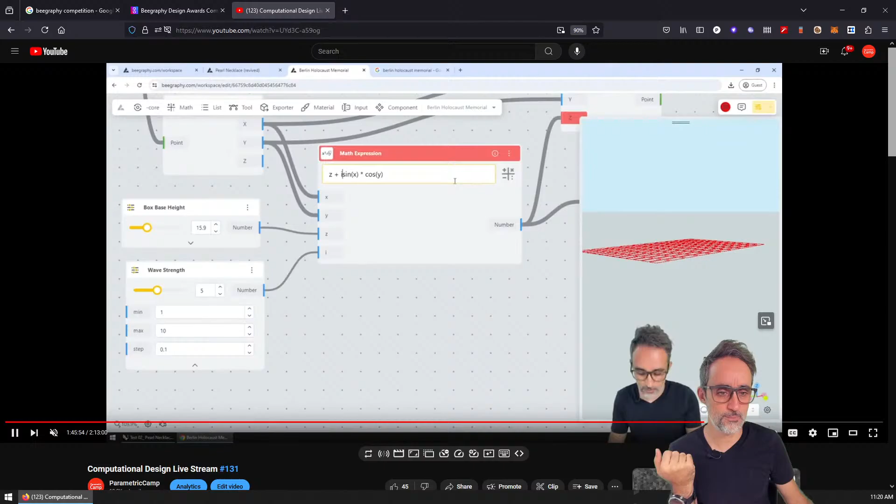On the last live stream we did, we basically played around with the Beegraphy editor, and we made the Holocaust memorial exercise.

And then we made another exercise just to try it out. So what I would like to do today is, I had a plan for 4 videos that I wanted to make. I want to make a short series of intro to Beegraphy videos, and this should be very short. So intro to the editor, then the 2 examples that we did last week, a bit more streamlined than last week, because last week I was just trying on and off.

And then just make like a small thing. So I would like to do that today.

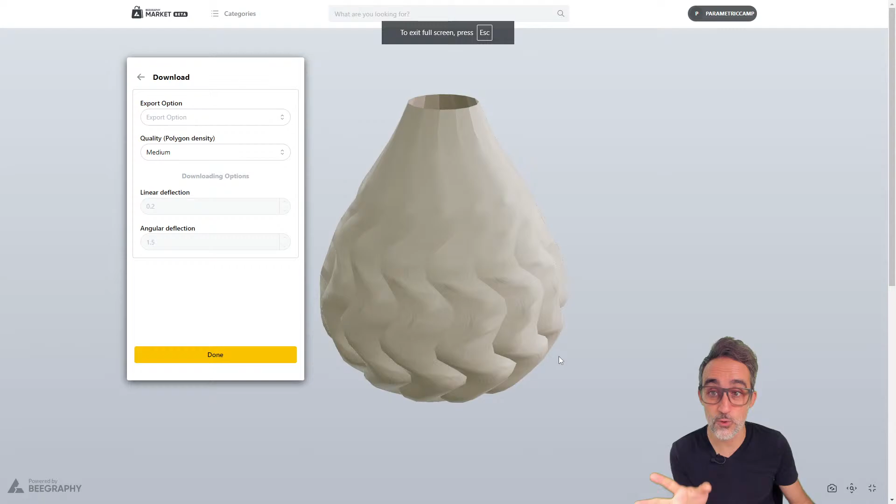This is, what is this? This is very, oh, this is very nice, to customize the model and then just download a version of it, down, etc. Yeah, which I think is, again, to me one of the coolest features. It's one of the most powerful features. The fact that you can make a parametric definition, a parametric model, and then just make it accessible and usable to everyone for download super fast, with this very interesting UI. So that's going to be the intro that I want to do.

So let's get started then. So I'm going to then, now what is this? Yep, I'm going to, why am I not? Okay, okay, here.

Okay, so we're going to start here in the first intro video. And the first intro video was going to be a general short intro. So what am I going to do? I'm going to say, this is Beegraphy. It's July 2023. So if you're watching this in the future, maybe things have changed. But right now, I want to make a short intro to the series.

In the first video, we're going to focus on the editor, and then on the editor, I'm just going to make a new model. It's going to be blah, blah, blah. And then you're going to have here the window. You're going to have here the components, sequence, tools, etc. And then exporter, which we will talk about when we talk about the market, I think.

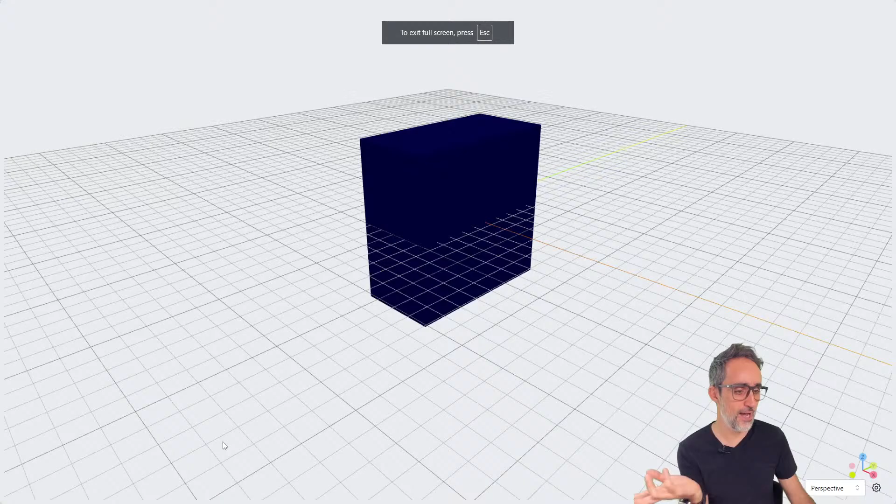And remember, the 3D viewer, I can make it full screen, I can change the shadings, I can turn off the grid, for example. I can do top view, front view, perspective view. It's actually quite nice.

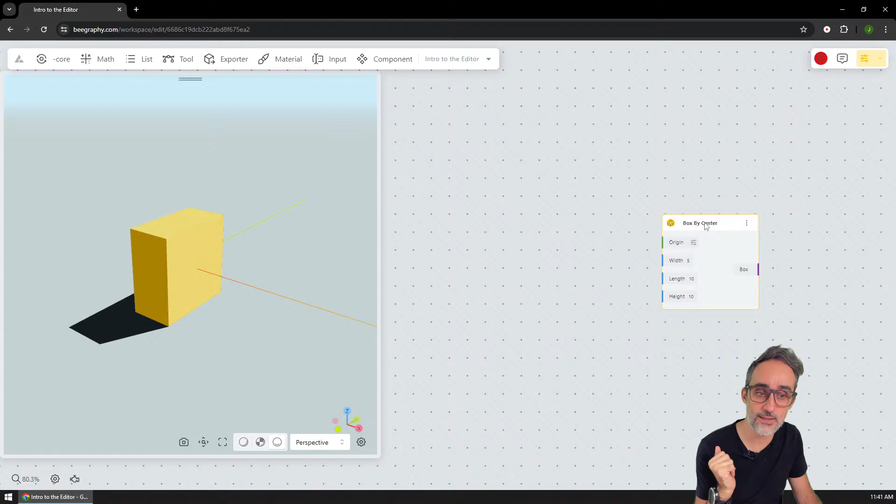But if I don't know where to find things, or if I don't want to sit down and look through all the possible options because it's a little overwhelming, I can just double click on the canvas and this drop down search box will show up. So I can type here box, and you can see I have a bunch of options for what I can do with boxes. For example, I can do box by center, which is the one I had before. You can see right now the box is centered at the origin.

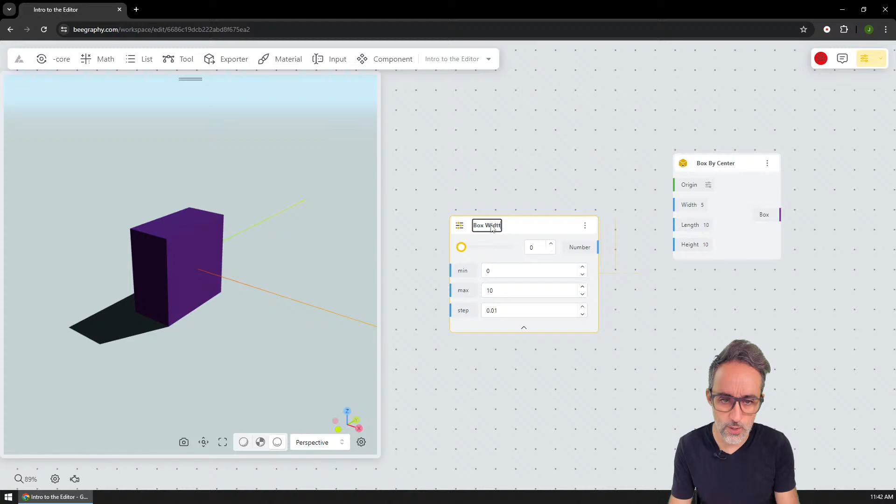It has a width, length, height, so I probably want to customize the dimensions. The way I do that is using a slider. Here in Beegraphy, sliders are called range inputs. If I click on range input, I get a slider that I can customize. So for example, this is going to be 10, in increments of 0.01. I'm going to double click here to say box width, and I'm going to plug this in here. Then I plug this in here, and I'm getting an error.

It has to be greater than 0. So this is going to be the length, and now this is going to be the height, correct? You saw that I did that by basically copy pasting. So now I have width control, height control, and length control.

Beautiful. And you can also see that under the origin, I have an input of the type point, which means I can control as well where the center of this box is. So maybe what I want to do is customize that center by creating a point manually. Let's go to point and construct a point by XYZ coordinates. Right now that point is centered at 0, 0, 0.

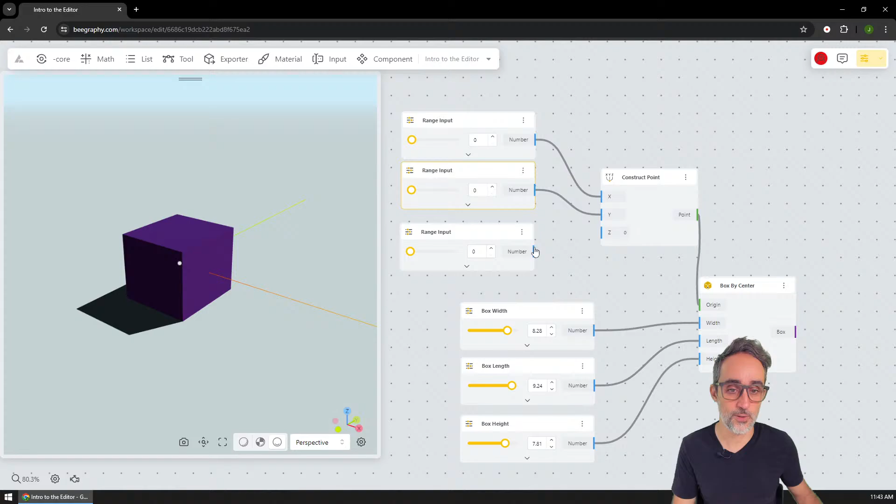But if I do the same thing and set a range input, and copy paste this 3 times, and say it's going to be X, Y, Z, now I can control the location of this box. All right, beautiful, so that's it.

Literally, this is just the Beegraphy editor. As you can see, the UI is very familiar if you have used other visual programming environments. If you have not, I recommend you take a look at our Introduction to Parametric Modeling playlist, there's a card popping up on the corner right now. It's very easy, very intuitive, very familiar, and you will have an easy time connecting with the way the Beegraphy editor allows you to model things in 3D.

All right, beautiful. So with this, I just wanted to make a simple example. You don't have to change anything, you don't have to save everything. Any kind of changes you make are already saved in the file, in the cloud, in the dashboard inside of Beegraphy, so no need to worry about this.

And then what I would like to do is make a couple hands-on exercises to practice and to do more sophisticated modeling here in Beegraphy. Let's move on to the next video in this playlist, where I'm going to teach you how to model a necklace, for example, full of pearls, using the Beegraphy editor. Let's take a look at how to do that. See you in the next video. Bye.

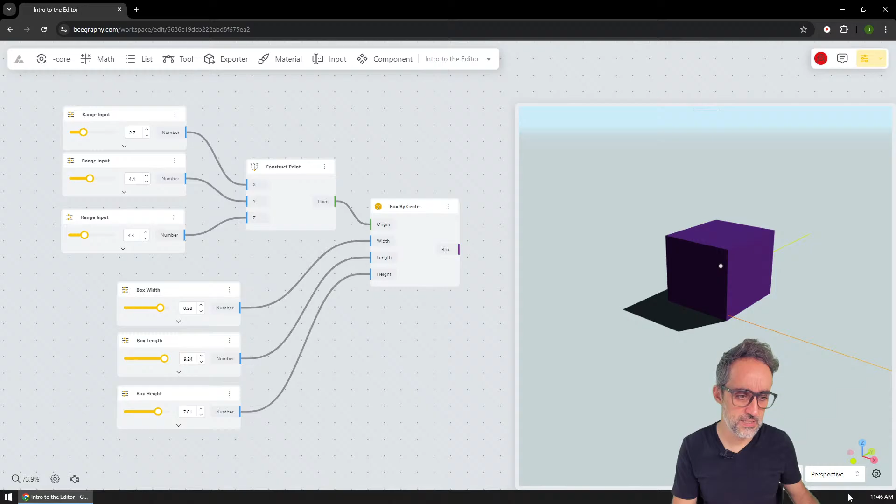Okay, now question: should I keep the window here on the left-hand side? Since I'm here on the right-hand side, it's probably easier to see things. Or maybe not, because if I have the thing here and the thing here, maybe it's a little easier? Maybe it is, I don't really know. Yeah, maybe I can leave it like this. Why not? This is how the Beegraphy folks designed it, so why not, we can give it a try. All right.

Beautiful. So we're going to go on to the next video, where we're going to record a pearl necklace.

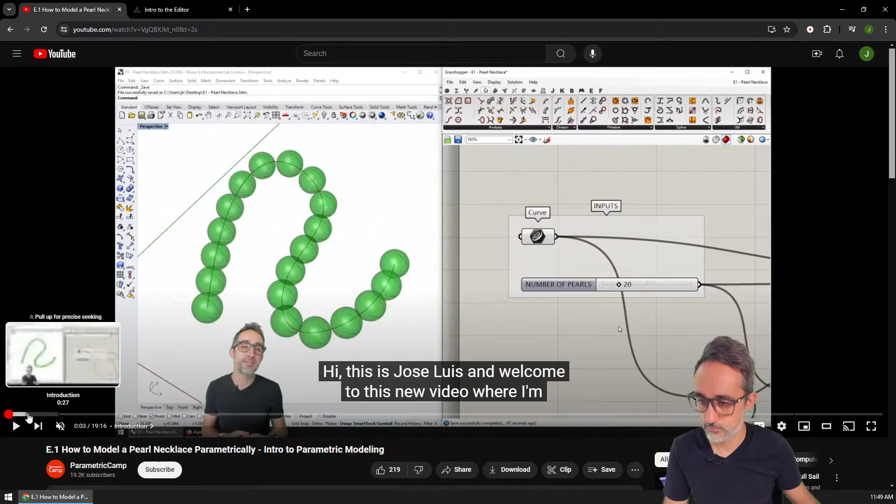Wow, I recorded this video three years ago. Look, I look so young. Oh my God, oh boy.

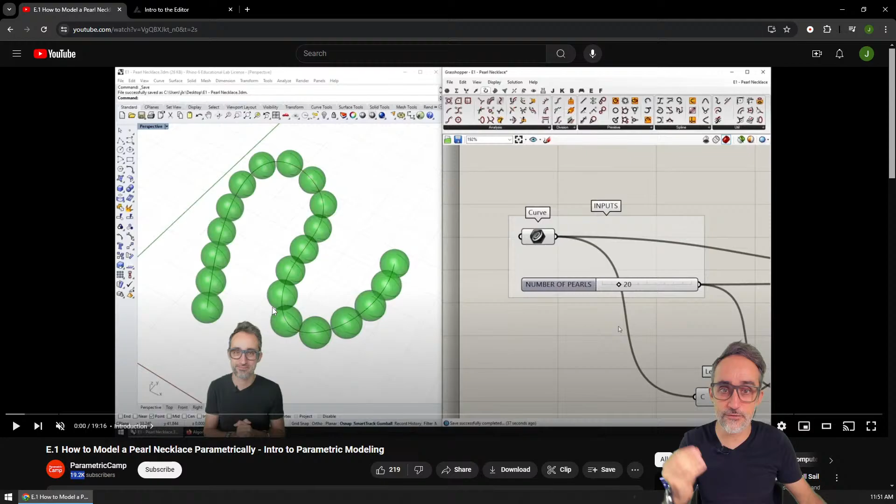Beautiful, let's get started. But before we start, I'd like to remind everyone that this pearl necklace is an exercise we've already done on this channel in another visual programming environment called Grasshopper. If you want to learn about the logic and how we break down a curve into parts, I already explained it in that video, including the logic about the diameter of the balls and splitting of the curve. So if you want to learn more, I recommend checking that video, whose link will be in the description and will pop up as a card in the corner of this video.

Okay, beautiful, so we're going to go to the Beegraphy editor. All right, we are here at Beegraphy, I'm already logged into my account. I'm going to go to the editor and create a new model called Pearl Necklace Live. All right, beautiful, then we'll land in the Beegraphy editor, which we already explained in the previous video in this series.

So the first thing we're going to do, if you remember from the video on how to model a pearl necklace, is create some kind of curve, which will basically be the axis of the necklace. Then we'll subdivide that curve into however many pearls we want, and decide what the radius of those pearls should be.

All right, so Beegraphy as of right now does not come with geometry import capabilities, so it's a purely standalone parametric modeler. You can't really import models yet, but my understanding is that the team is working on that right now. The thing we can do is, inside Beegraphy, add a modeler for this parametric curve that we want to control.

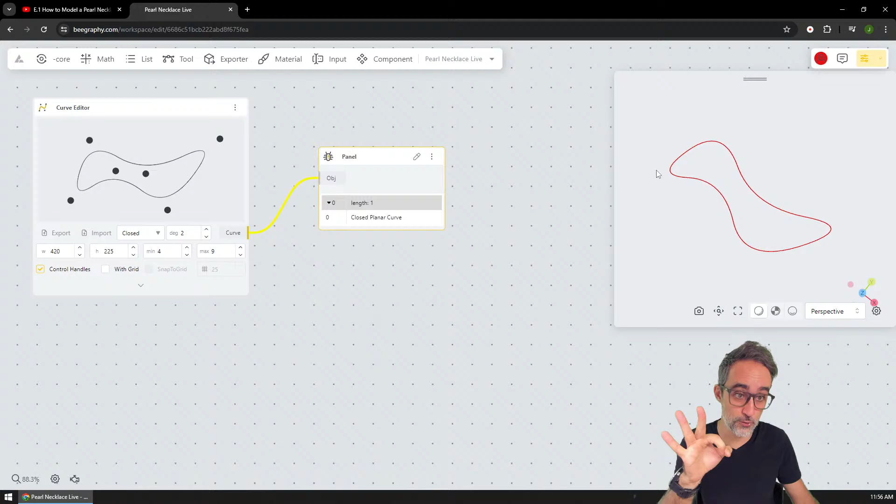So what I'm going to do is say divide by count, and you can see that right now I have this divide by count on a curve. So I'm going to plug in the curve here, and you can see that I already subdivided it in 4 elements. But I do want to have control over that, so I'm going to just say here range input.

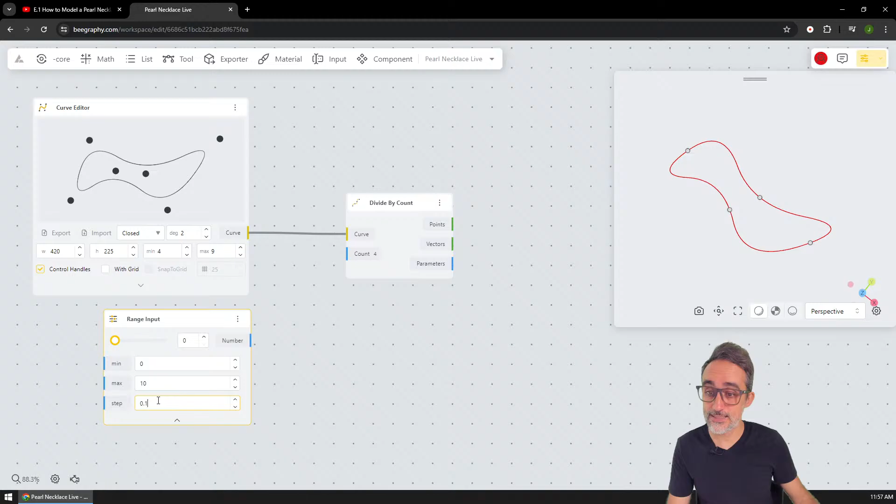And I'm going to place here a slider. But this slider, I'm going to configure it so that it can only snap to whole values, so to integers, right? And the maximum is going to be 50, for example, and the value is going to be 10. So I'm going to minimize this, and I'm going to say here number of pearls.

All right, beautiful. I'm going to plug this in here, and you can now see that the more pearls, the more subdivisions, the more points I get.

One very nice feature about this is that I can now go onto the window and click on an element. And if I click on the element, it will tell me where that element is coming from. So you can see that basically the UI just zoomed into divide by count, which is the component that is creating all these points here. This is a really, really nice feature because very often we have a lot of geometry on the viewport and we don't know which components are generating that geometry. So this idea of clicking and seeing which component is creating that geometry, I find it a very useful feature.

All right, beautiful. So now we have the points. We also have the tangents at the curve on those points. We have the parameter, so the value from 0 to 1 or other that is telling us where those points are on the curve. So what I would like to use now is these points as the center of the pearls that I'm going to create.

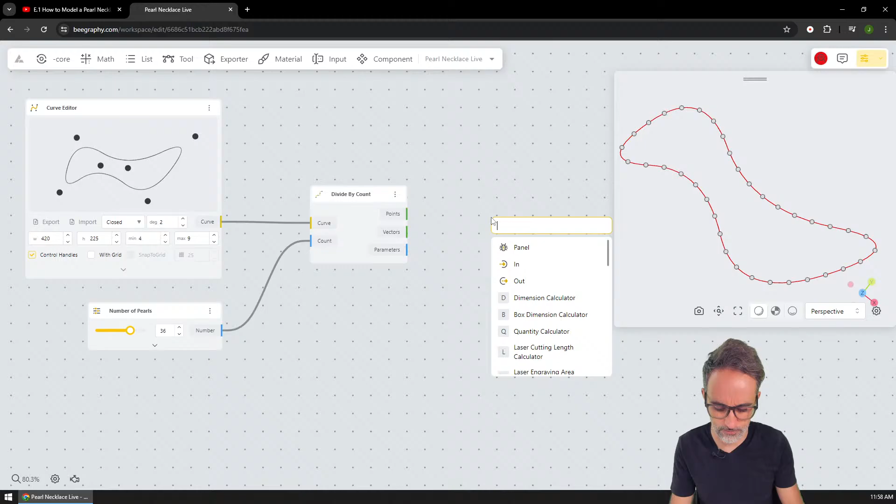So I'm going to go here and say sphere. I'm going to create a bunch of spheres at this origin. Okay, and you can see that right now it created all these spheres right there, and you can actually see that it feels like they're almost tangent to each other.

So I'm actually going to go to top view, and you can see that they're actually pretty tangent to each other, except for some areas. But this is misleading because if I were to increase or decrease, it was just a coincidence.

Right now the radius of the sphere is a hard-coded value. But what we need to do is estimate what that radius should be based on the length of the curve. So we're going to take the curve, calculate its length, and divide the length by the amount of pearls, and that should be approximately the diameter of each one of these pearls.

So easy peasy. We have the curve, and we need to calculate the length of the curve. So how am I going to do that? I see that I type 'length' here and I get this component called curve length. I'm going to go here and get the length, and drop a panel just to see what's going on here. I can see that the length of this curve is 652 units, whatever those units are.

Then I'm going to subdivide that length by the amount of pearls that I have. I could do that numerically using the math components, but you already know that I like expressions. So here in inputs, there's the math expression component that lets me write a mathematical equation that gets evaluated. I'm going to plug in the length, and then create another input. How did I create more inputs? Here, add port—you click on one of the inputs and click add port—so the number of pearls is going to be here.

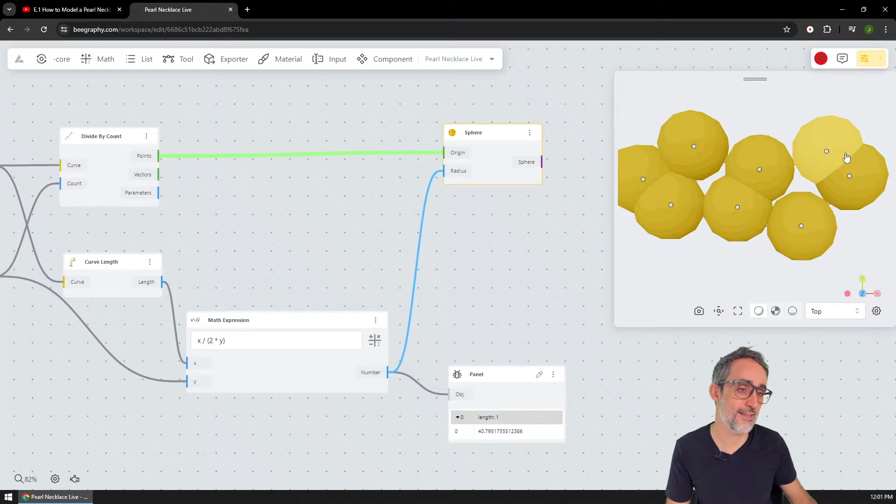You can see that now they are a little bulgy, and at the areas where I have a lot of curvature, it's not very natural. So maybe I can reduce those steep curvatures. But you can also see that if I increase the number of points, the size of the pearls adapts correspondingly, which is also quite nice.

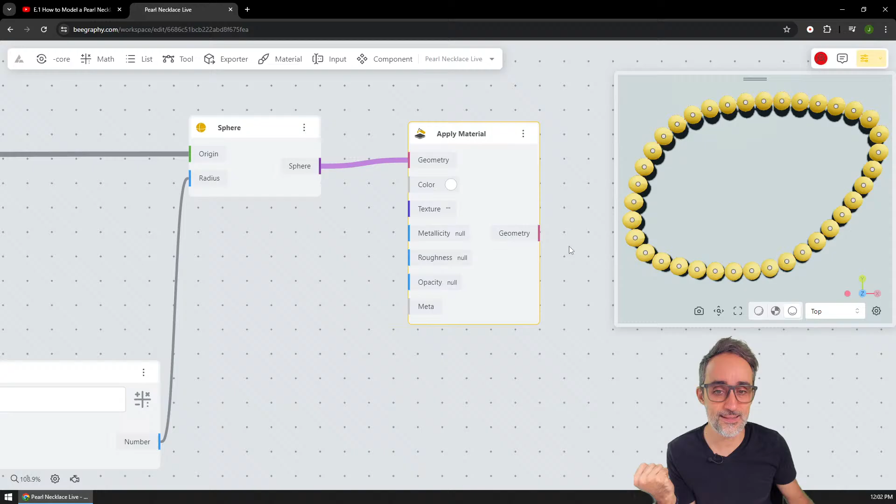What I would like to do is change that to something a bit more steady and controllable. So I'm going to go here to material, to apply materials. This is basically a component that lets me create a material and apply it to any kind of geometry. For example, here to the spheres, I'm going to apply this—can I create a color picker? Yes, so I'm going to create a color picker, and that's going to be some kind of orange here. The color is going to be orange, you see? Or if I make it green, then green it is. Now things are a little more homogeneous.

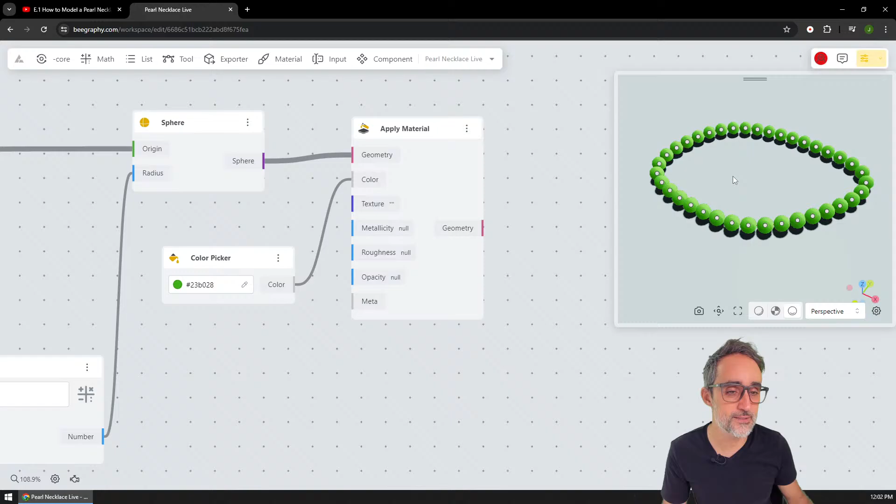Another thing I'd like to do to beautify this a little more: you can see that now I have modeled the spheres, but I still see the dots, the centers of those spheres, the points I used to create them. I know that if I click here on the sphere component, the origin is this divided by count. So something I can do is hide this component so it doesn't show up on the pre-visualization here.

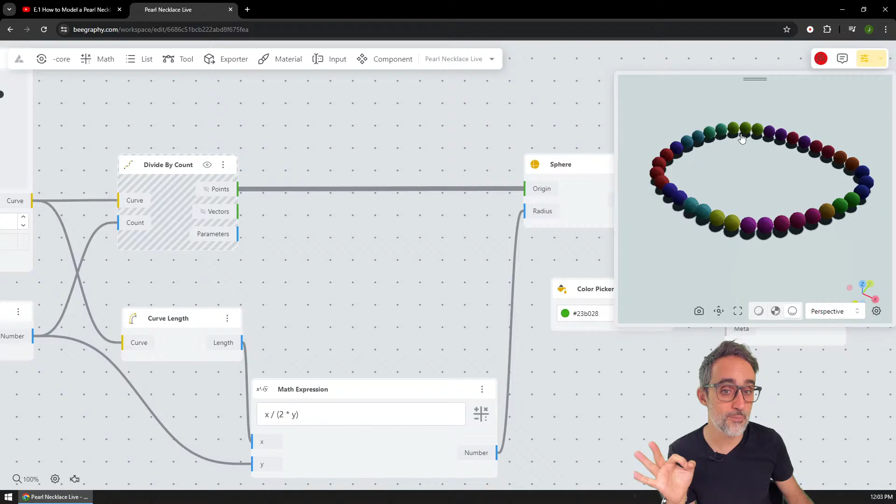Okay, beautiful. All right, and I think with that, I am pretty much done. Now, you may ask yourself, all right, you created the parametric modeling editor, now we have all the pearls, but now I want to download them because I want to render them in some software, I want to 3D print them, whatever. How do I do that?

Well, that's a very good question, and I would like to address that farther down the road in this series of videos when we start talking about the market. It's not necessarily that you need that, but if you're interested, circle back in the next video or in 2 or 3 videos when we talk about exporting geometry and publishing models to the market.

Until then, I think the next video in this series is going to be another hands-on example to give you a sense of how the Beegraphy editor works. We're probably going to model the Berlin Holocaust Memorial in the next exercise. All right, beautiful. See you on the next video, bye bye.

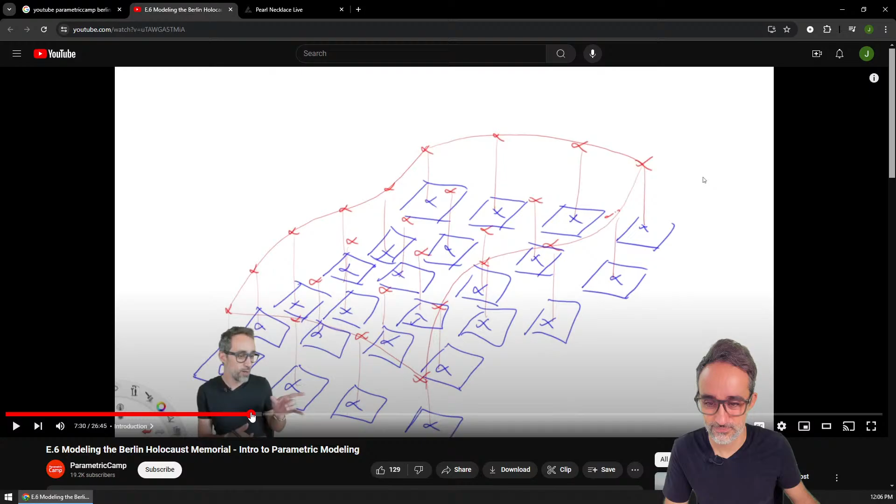6:22, oh, I have to record the intro. Oh, I forgot, I have to record the intro. All right, so let's record the intro. Okay, so the intro to the video. What am I going to say?

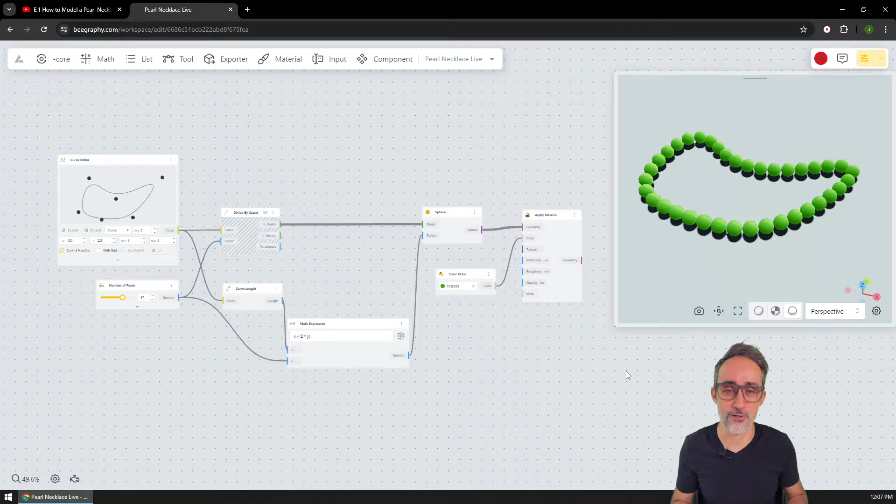Hello, this is Jose Luis here at Parametric Camp, and welcome to another video in this mini series crash course on the Beegraphy platform, or I'm not even sure how we're going to call this playlist at this point. But in this first hands-on exercise, what I would like to do is practice modeling something with the Beegraphy editor. For this video, I've chosen a very simple exercise, modeling a pearl necklace. As you can see, we have modeled it with the Beegraphy editor, including this very nice and nifty curve editor for the shape of the necklace, as well as introducing parameters for the amount of pearls. You can see that as I change things, the number of elements is updating, and you can see here in the viewport, I can rotate and see the results of my parametric model.

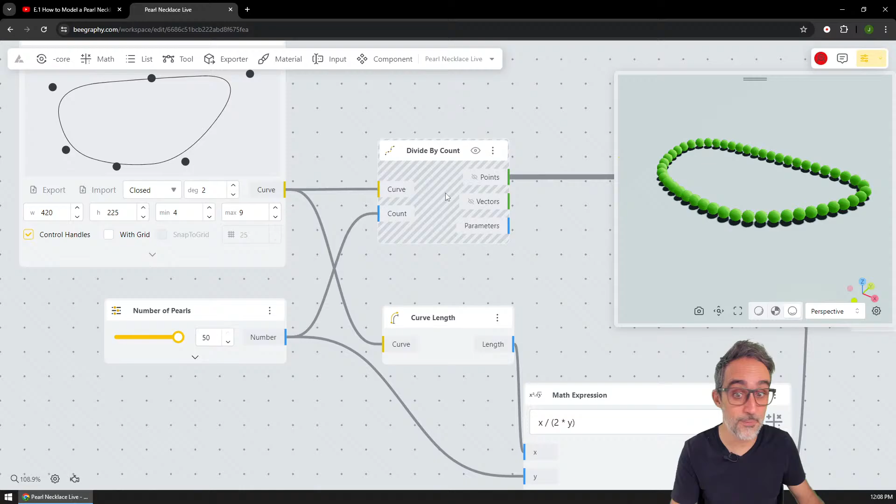And again, for those of you who might be new to the channel, what's really interesting is that everything I'm doing right here is purely web-based, using my browser. No downloads, no installs, no nothing. Everything is cloud-based, web-based, which is really, really nice.

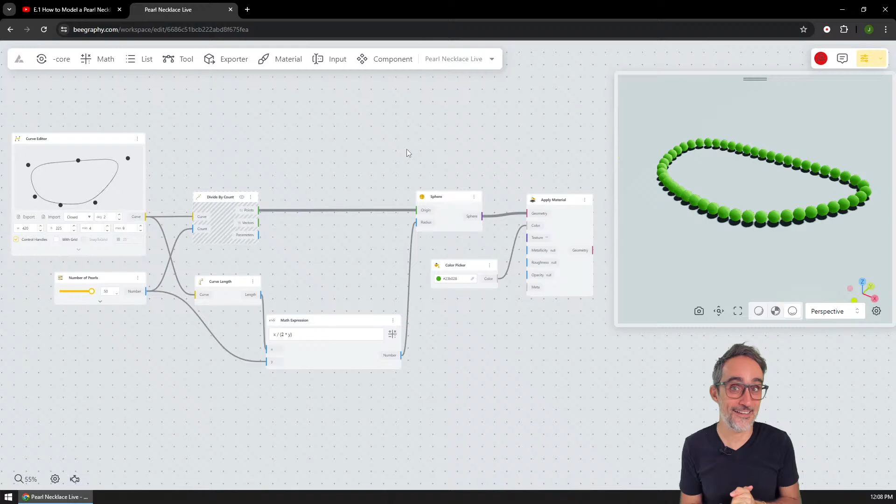Fantastic. Okay. All right, and then here. Oh my God, who placed all these ads here on the channel? Huh? Okay, beautiful.

So now we're going to do the Berlin Holocaust Memorial. Same thing, let me actually go back here and take a look at how we did this. Oh, and this was the whole fuss that we made for either random or not random. Rectangular grid. How did we do this?

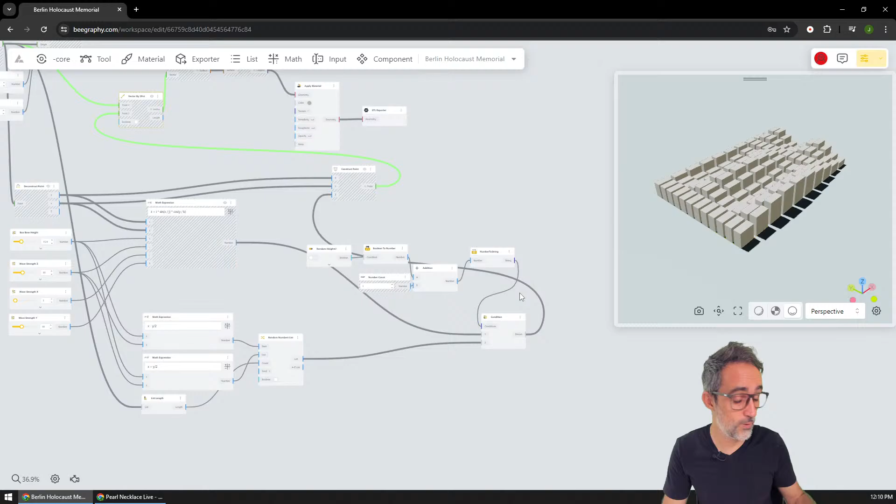Untitled group, spacing, extrude curve, vector by 2 points, and the extrusion was coming from a sine wave, and then we were capping it, or the extrusion was coming from a random number list, random number generator. And this was, maybe I can also point to the version when I did this in the live stream if people want to learn more about how to use these random heights, whatever. Okay.

All right, so the way we're going to record this video is we're going to go there, we're going to record the intro later, and then we're just going to do the same thing. I'm going to introduce the exercise from the other videos, and then I'm just going to go in, create the file on the dashboard. I'm going to then start step by step, creating the rectangular grid, creating the rectangles, and then writing the algorithm for the curvature.

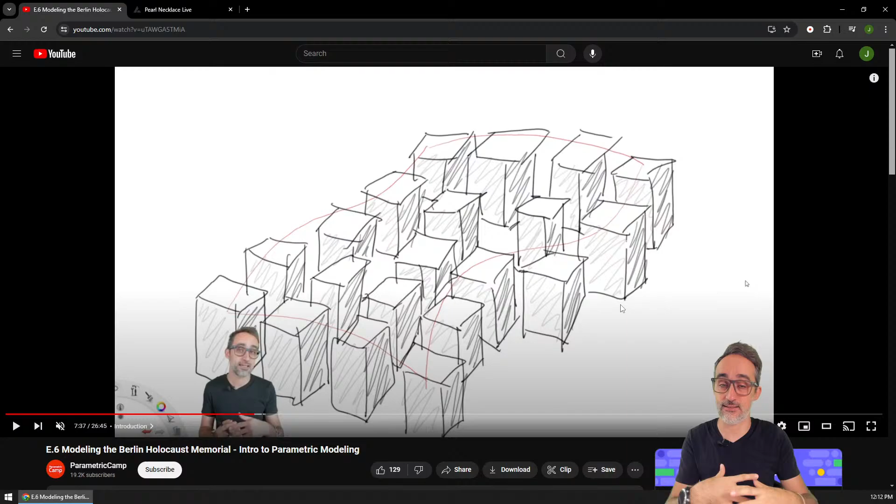Okay, so we're going to do just like we do with any model in Beegraphy. I'm going to go to my dashboard - I'm already logged in with my account - and create a new model. I'm going to call this Berlin Memorial Live, and create a new empty model.

How am I going to start? Well, if you remember from the image I showed before, the memorial is basically a collection of concrete blocks that have roughly the shape of a box. What makes the monument interesting is that they're all arrayed in this grid-like manner, but the height of each box is variable - it differs.

So what we're going to do is start by creating a grid of points, roughly a rectangular grid, and then create blocks at each of those points - we're going to create boxes. Once we've done that, we'll modify the algorithm so the height of each box is different based on some kind of rule. Let me get started with that.

First, I'm going to create a grid of points, which I'll use as the basis for rectangles that I will extrude into boxes. How do I start creating a grid of points?

Let's imagine I'm fairly new to the editor. I'm going to double click and say I need something like a grid. I'll search grid, and it turns out I have a rectangular grid - that's pretty useful. You can see I already have this preview of the grid with the origin, width, length, how many elements in each one, etc. That's pretty nice.

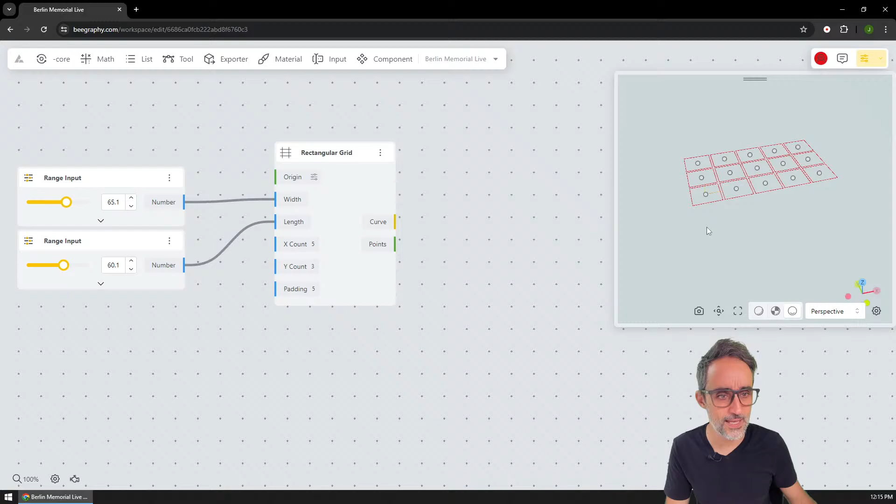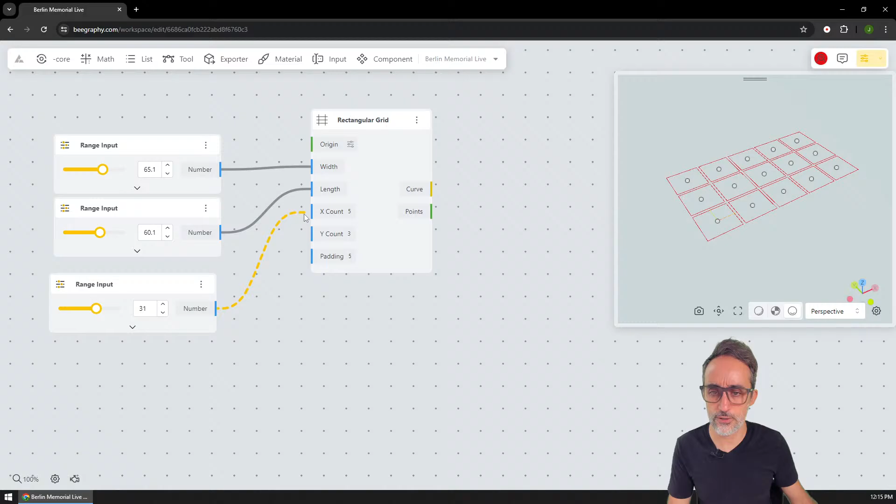Something else I want is the amount of elements in each direction. For those I want integer inputs, which I do by customizing the input to only snap to increments of 1. This slider will go from 0 to 50, and I'll do 30 of these elements, then another 30 in the y direction. You can see I already have a lot of elements, so I'm going to lower the count for a more responsive, faster modeling environment - for example, 10 and 5.

Now, this particular rectangular grid gives me width, length, x count, and the padding - the gap between rectangles - and it gives me both the center points and the curves, which are the rectangles I can extrude. We could go with this and just control the padding, which would control the distance between them.

But I don't personally like that a lot because the distance then has to be the same in both directions, x and y, and it feels like I have less control. So I kind of like better to control the width and the height of each box independently, regardless of where they are.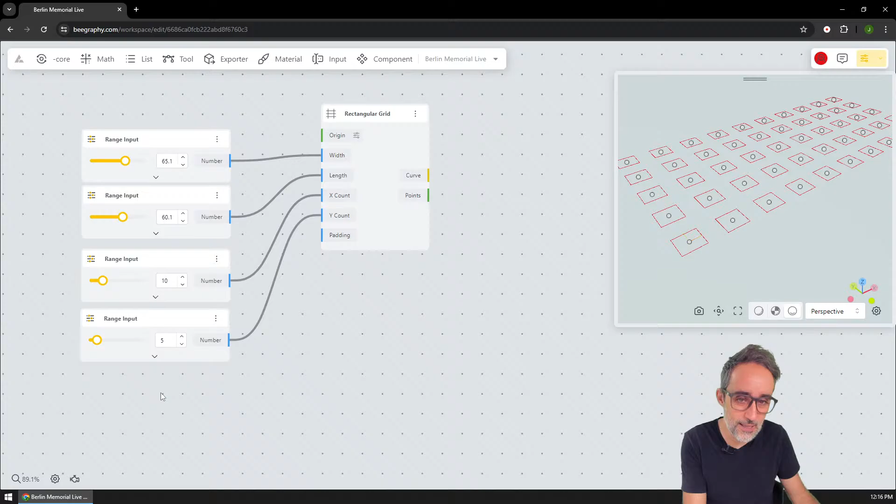You can also notice that the moment I make the gap bigger, the entire grid also enlarges. So I could go for that, but also for the sake of practicing things, I'm going to ignore the curves coming out of the component.

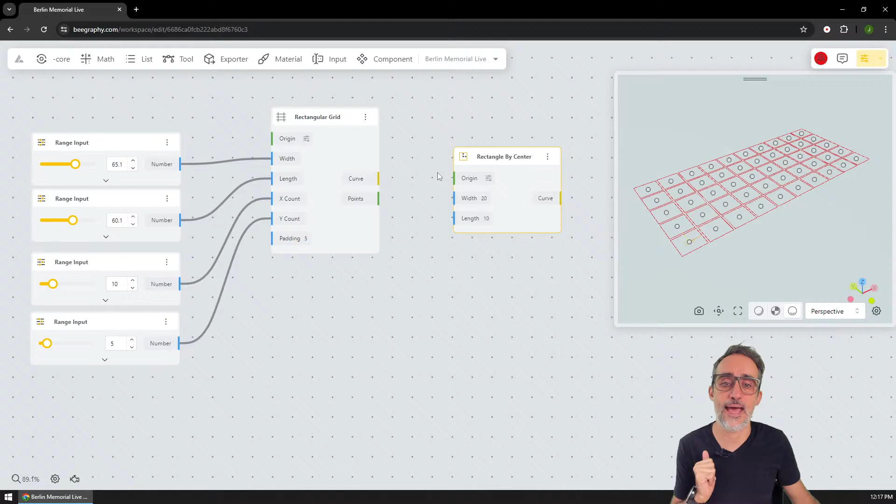I'm just going to work with the points only, and use the points as the center of a collection of rectangles. So for example, rectangle by center, and I'm going to use the points as the origins.

For width and height, I'm going to copy some range input. This is going to be the width, which is going to be something like this. And this is going to be the length. And then I'm going to get all these curves and turn this off.

And you're going to see that now I have these tiny rectangles that I need to increase. And I think I probably need to make some of these smaller.

Yes, exactly. I may need to increase this to 50. Okay, so 50, and then here 50 too, okay.

So now I can increase this. Exactly, so now I have more—you see what I mean with this? I have more fine control over the size of each one of the boxes independently, which I kind of like better. I like control when I'm doing parametric modeling.

All right, beautiful. So I now have a grid of rectangles, and I'm going to start moving things here to the left-hand side so that I have all my inputs right here.

Something that we can do with the editor is we can group things. So for example, I'm going to create a group, and this is going to be called grid parameters. And I'm going to create another group here, click on create group, and double click and say this is going to be called box parameters.

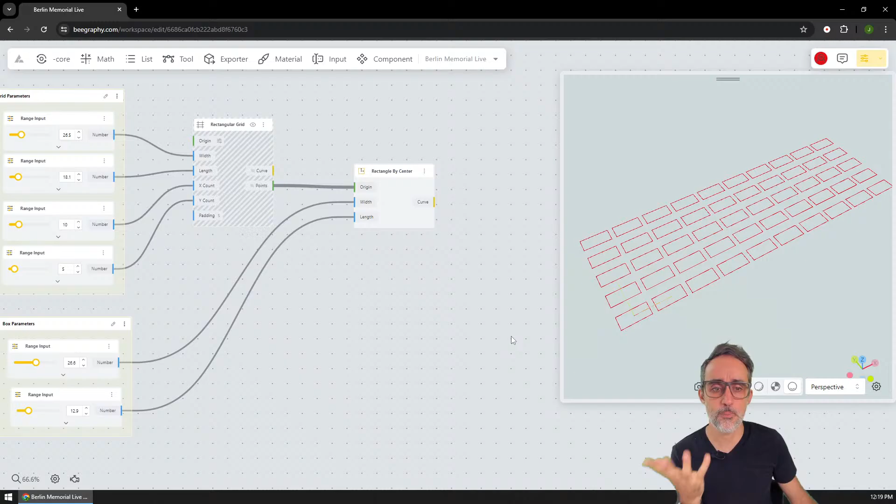And at some point I will add names here for what each thing is. But now, so I have rectangles in 2D, but I want boxes. So I'm going to want to extrude each one of these rectangles. So I'm going to go here, and is there any kind of extrude?

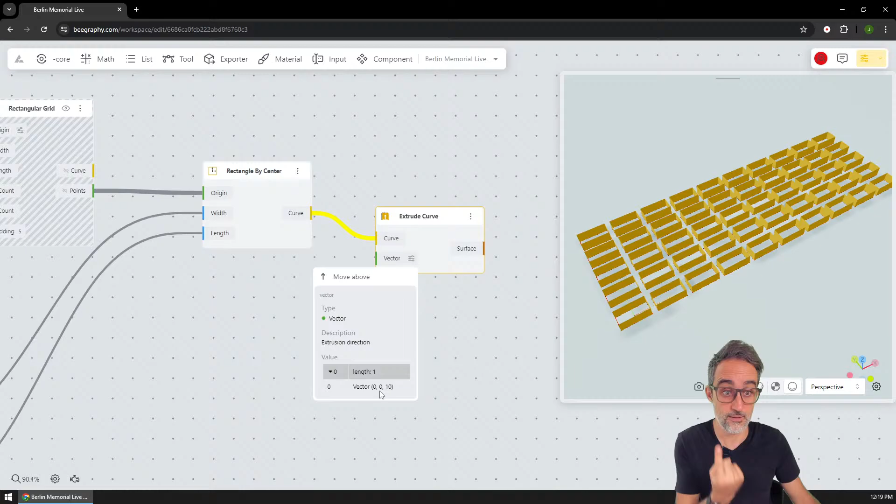Yes, there is extrude here. So I'm going to extrude the curve, for example, and I'm going to take all these rectangles, and the vector is going to be—I don't know what's here by default—a vector with 10 units, vertical 10 units. I can work with that.

So for example, let's say that I'm going to leave it like this, like a 10 or not. Actually, let me create a vector in the z direction, and the factor is going to be some kind of value from 0 to 50.

This is going to be temporary, just temporary. Because what I want is, yes, just to start with a bunch of boxes that are all the same height. You can see that these boxes, though, are empty. So I'm only extruding the curve, and therefore I only have the shell, the boundary shell, if you will.

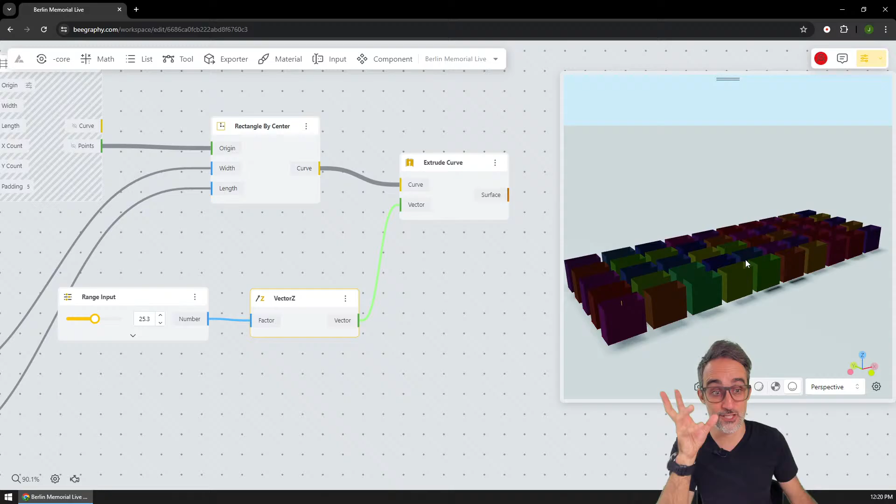So something that I would want to do is cap those surfaces and close them up. And then you see that the moment I do this, then now they are closed on the top and on the bottom. All right, beautiful.

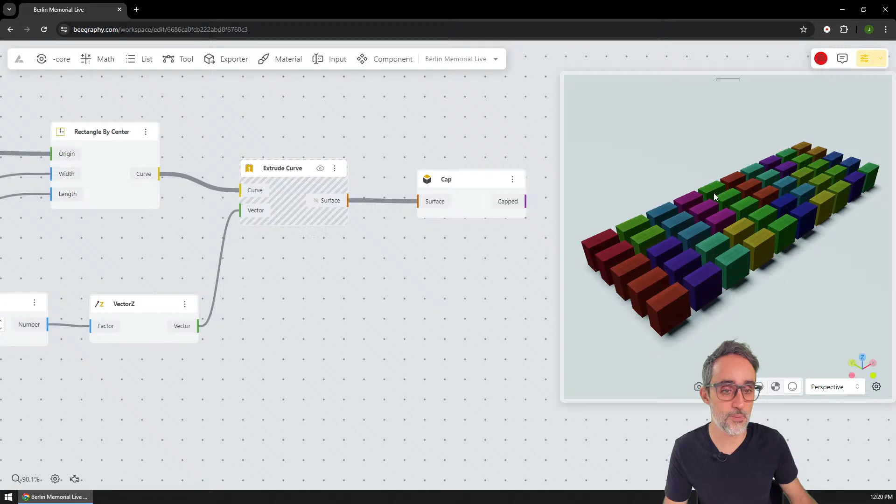So therefore I can stop and hide these folks and then just keep the boxes that I have extruded. All right, beautiful. Okay, this is looking great so far.

Now, however, I'm going to need to extend this exercise to make something where the height of each one of the boxes is variable, according to the design of the original monument. How are we going to do this?

Well, it turns out that as of right now, the Beegraphy editor doesn't have inputs for importing geometry. So in the previous video, in the other video that I pointed as reference, what we did was model a surface and then calculate the distance between the base of the rectangles and that model surface.

In this editor, we can't do that right now. So what we're going to do is come up with some kind of mathematical expression, like a sine and a cosine, and use that expression to calculate the height of the box based on where the box is in the X and Y spaces.

Okay, beautiful. So how are we going to do that? Well, what I'm going to do is take each one of the points that are at the base of the rectangles, and deconstruct them to extract their X and Y coordinates.

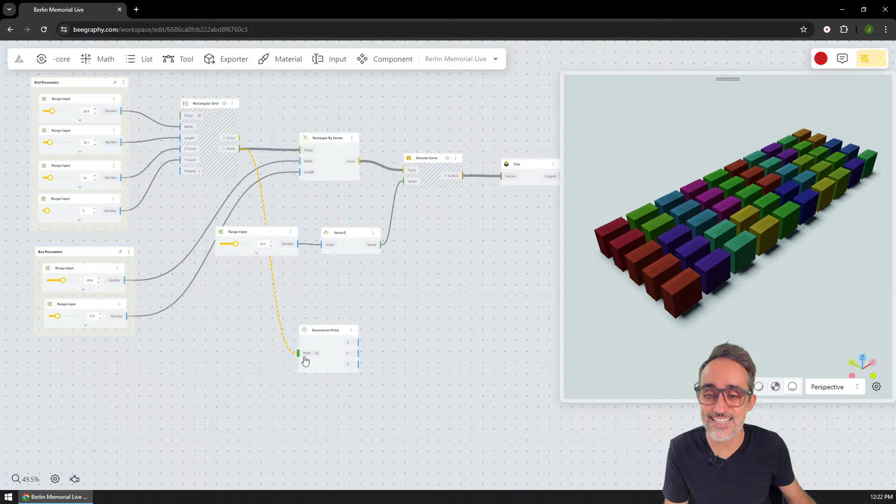You can see that by doing that, if I plug a panel here, what I have now is a collection of 50 X coordinates—0, 0, 31, blah, blah, blah, whatever—and the same goes for Y. So what am I going to do this for?

What I'm going to do now is design an expression where, given an X value and a Y value, I'll do some sines and cosines to calculate basically a wave in 2D for those values. So I'm going to go here to math expression, and add here, add port—the X coordinate and the Y coordinate.

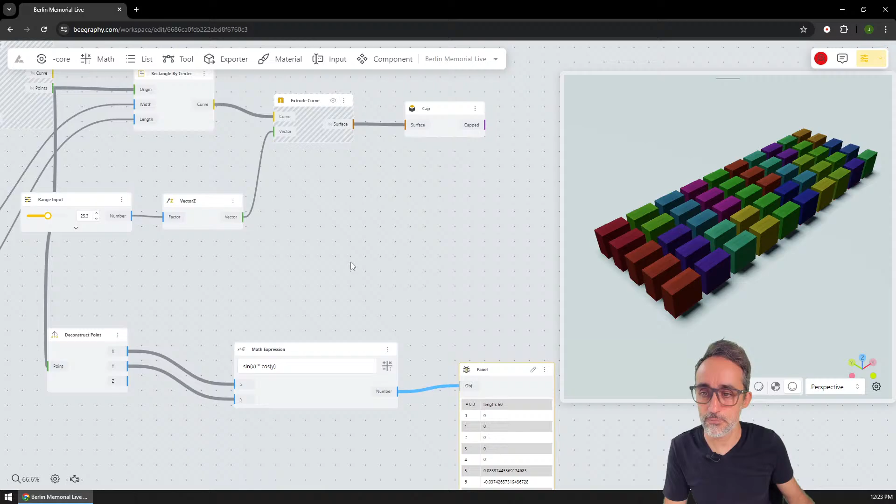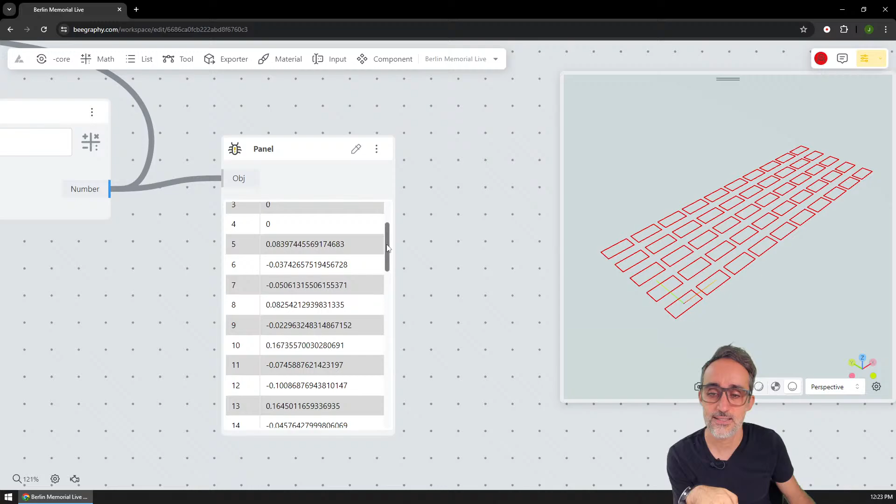So let me now remove this static number and plug in this instead. However, the result is pretty disappointing for a couple of reasons. First, I hit a bunch of zero values, so those are rectangles with basically no height. And because I'm working with sines and cosines, some values are positive, some negative, and most values are pretty small, basically in the range of -1 to +1.

So what we need to do is massage these numbers a little bit, introducing some factors to amplify and correct them so that the range of values is much closer to the actual dimensions of these boxes. So how can we do that?

I'm going to add a new port, and I'll call it Z. I'm going to add another port called I. The names of these ports are automatically generated by the system. And how can I add another port?

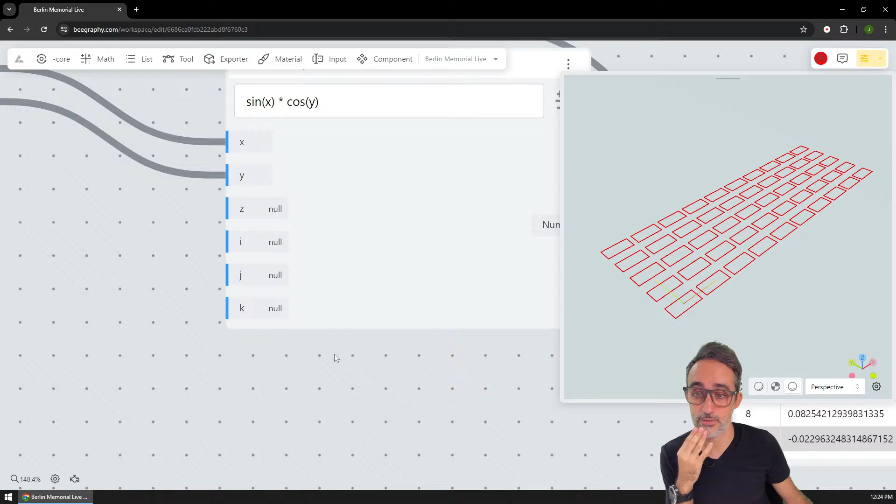Yes, okay. So I'm going to say that Z is going to be some kind of base height. This is going to be a slider from 0 to 50, and it's going to be Z, and I'm just going to add this base value. So any box is going to be this base height, for example 20, plus whatever variation.

Now we can see that the variation is very small—most numbers are in the 19 to 21 range. Still not a lot, okay? But at least we've solved the zero problem.

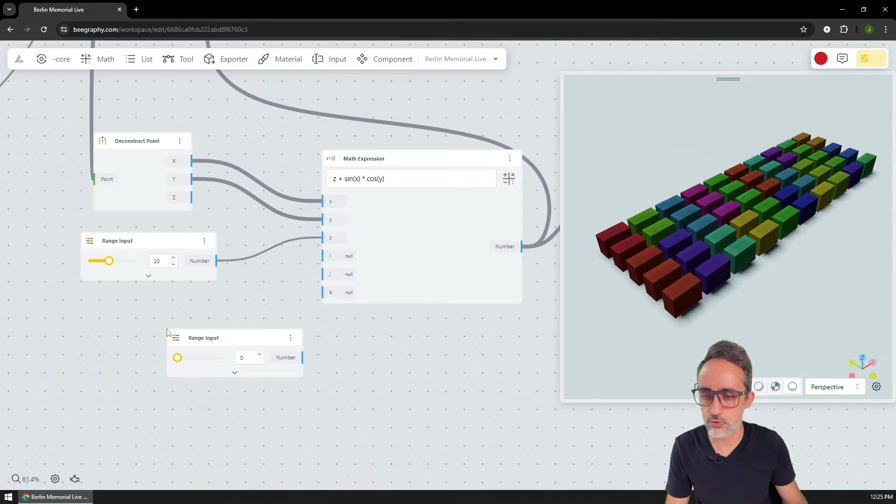What we can do now is amplify the values of X and Y by some factor. For example, I'm going to say that this is going to be the wave strength in the Z direction, and I'm going to multiply this here, and say that this is going to be that, and then multiply this by the entire thing.

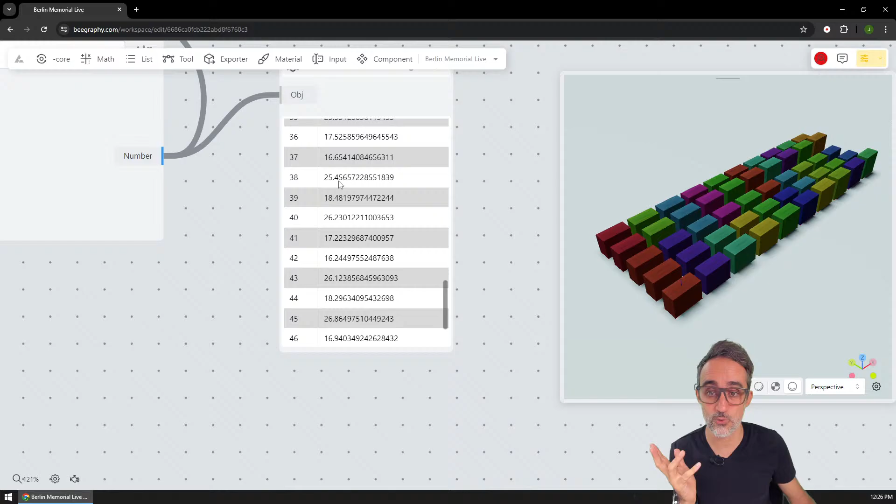What that is doing is actually in the Z—basically multiplying all these numbers here that oscillate between -1 and 1 by the value of 10. So now the range of values is much larger. You can see we get numbers like 23, 24, 17, 25. So the amplitude and the difference between these values is much, much larger.

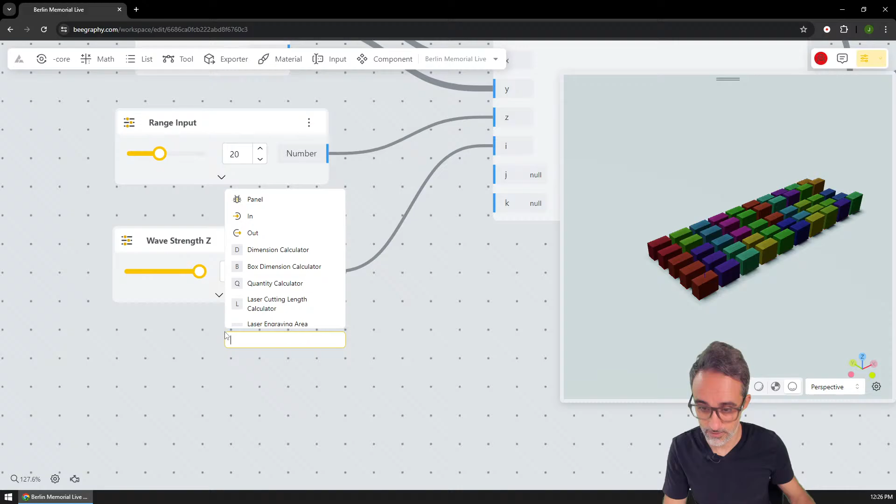And then something else we can do is modulate these two values so the waves have a different amplitude. So I'm just going to add here, for example, another couple of ranges—range input. So something is not working right now, let me see what's going on.

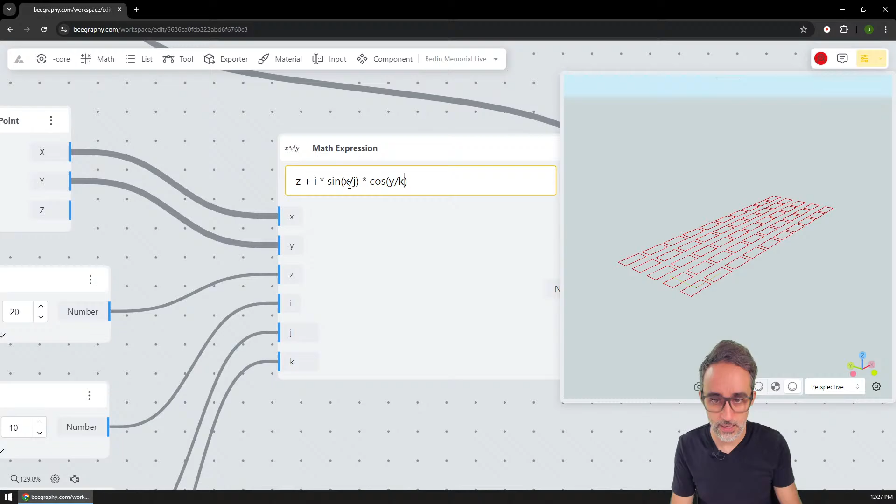I'm going to click here on range, get a new input, and connect this one here, and this one too. Then I'm going to divide x by j, and divide y by k. Now I can modulate this range, and you can see that the variability is going to be much larger. So you see we get this kind of effect of increased variability.

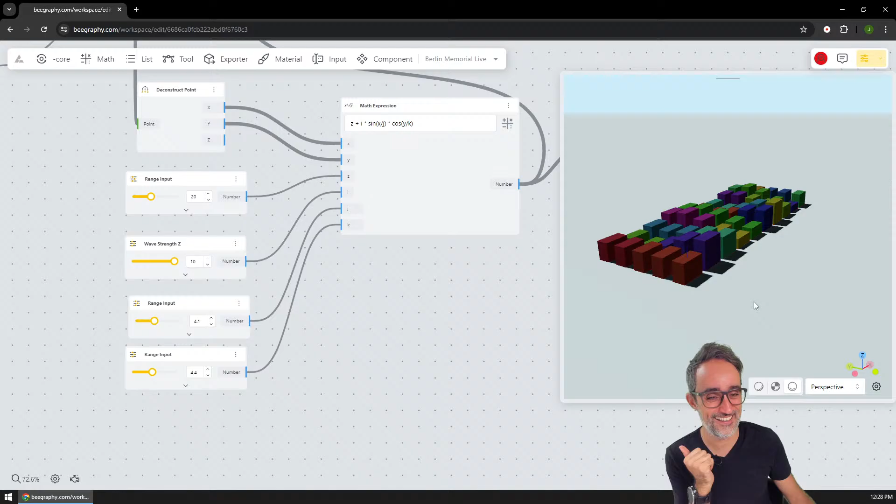Let's increase a few elements. Let's do 15 in this direction, 10 in this direction. No, 120, no. Okay, 120 is a lot, the app is going to take some time to recalculate. Give me a minute. Oh boy, look, look. Yes, I'm going to do just 10. Exactly, that's a much more feasible number.

Okay, beautiful. So I think with this, we are pretty much done, aren't we?

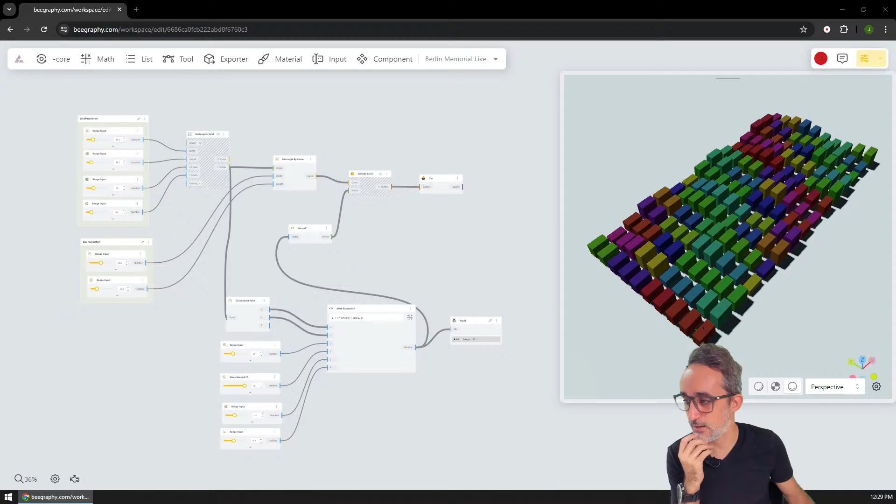I'm going to, for the sake of visualization, add a material as we did in the other example. I'm going to add some kind of color, and the color is going to be gray, just because I guess the original memorial is made of concrete, so we're going to make them a little grayish. And I'm going to also hide the rectangles at the base.

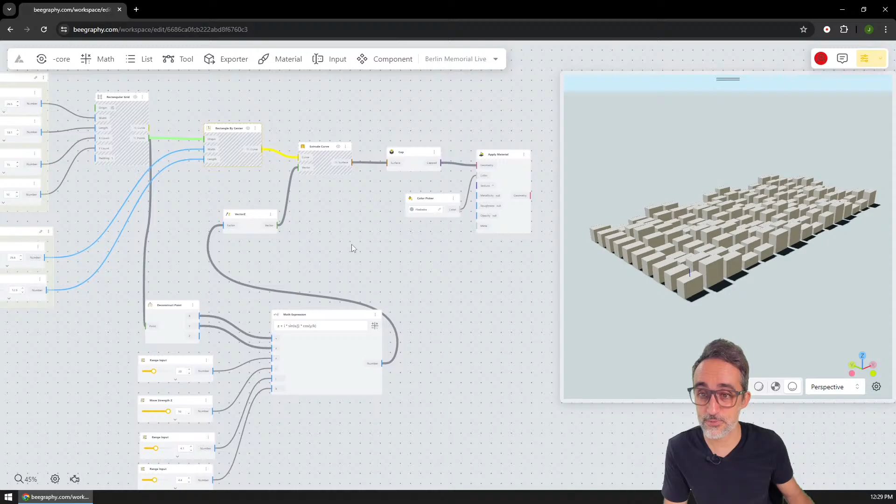And I think that's probably a good place to end the exercise here. Okay.

Beautiful. So we have something that resembles the Berlin Holocaust Memorial. And I think this has been a pretty good exercise in all also to see what kind of options we have with the Beegraphy editors in terms of modeling: a grid of points, rectangles, extrusions, etc.

Okay, now, again, as we said in the previous video, what now? So I have the model and I want to somehow download it, export it, and 3D print it or render it in some other software. What do I do with this now? That's exactly what I would like to address in the next video, where we're going to talk about how to export models in Beegraphy and also how to connect them with one of the coolest features of the Beegraphy platform, which is the market.

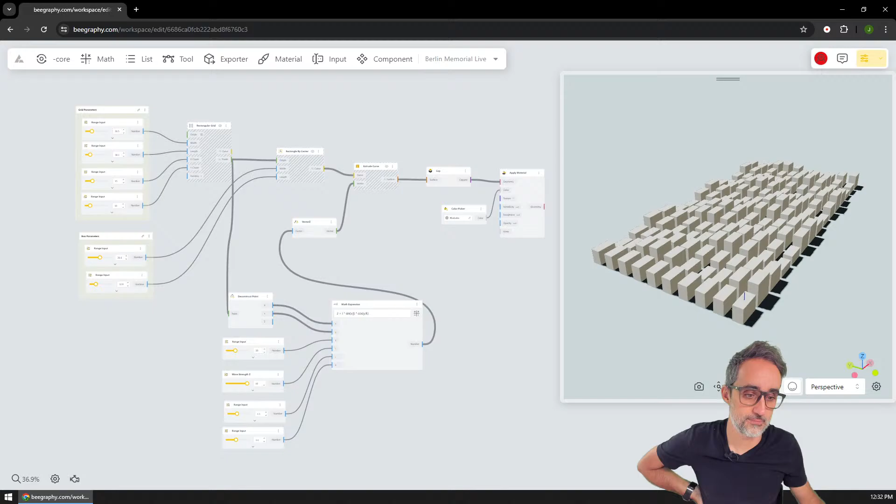Beautiful. All right. So, so, so what? So what now? Oh, what are we going to do? I had a sleepy morning today. What are we going to do? We have to record the intro to this video. Okay, that's very important. We have to record the intro to this video. And what else? That's it, pretty much. What if I do it like this? That's cool, huh? Alright, okay, so let's start like this.

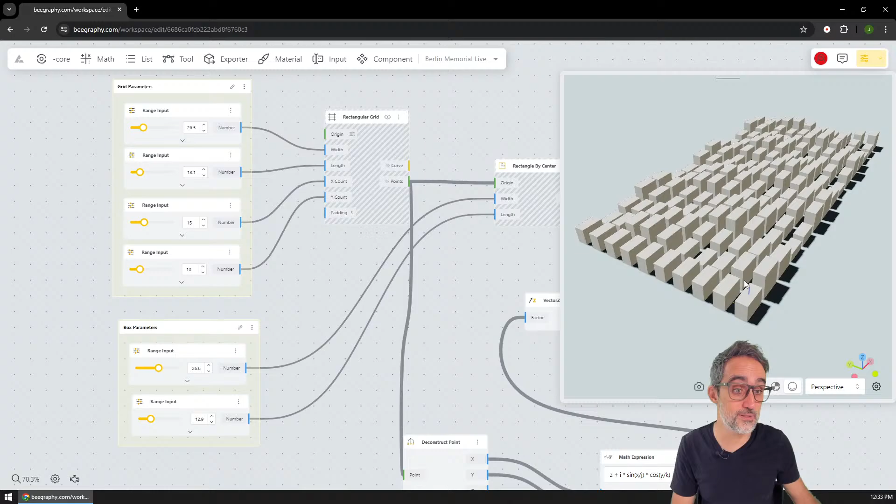Hello, this is Jose Luis here at Parametric Camp, and welcome to another video in our series Crash Course to the Beegraphy platform. I think that's going to be the name. In this video, I would like to do a hands-on exercise where we're going to try to model the Berlin Holocaust Memorial, which if you already know me from this channel, you know it's an exercise that I really like as an introduction to parametric modeling. The way we've done it in the Beegraphy platform, the Beegraphy editor, is by basically creating this parametric definition where we create a grid of points, place rectangles, extrude them, and give them variable height based on some sines and cosines functions. So you can see that everything is parametric, and if I were to change any of the inputs, then the whole model will basically readapt to it, as you can see right there. Beautiful. So if you want to learn how we did this, then just hang out in the video. Let's get right into it.

Okay, fantastic. So now the market, okay, very important. So how do we do the market? Because I haven't tried it yet.

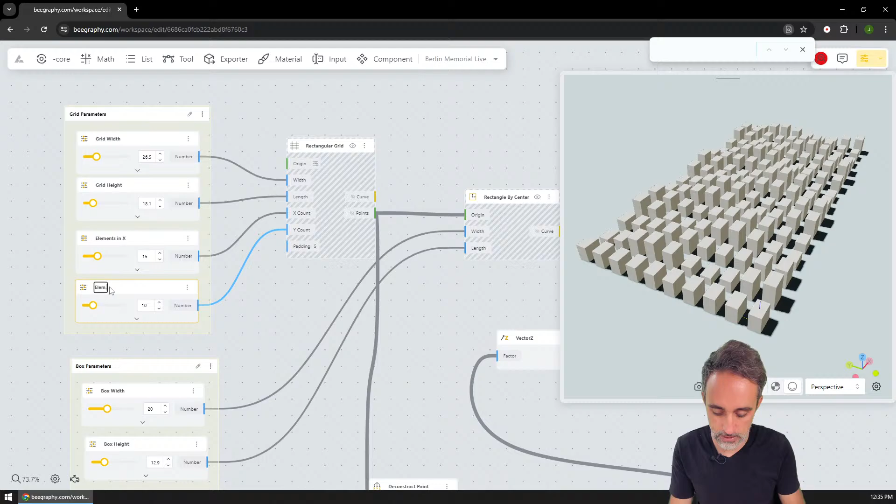Wave strength and wave strength Y. Box parameters: box width. This is important because when you go to the market, it's important to have everything labeled. So grid parameters: grid width, grid height, elements in X, elements in Y.

Beautiful. All right, so I haven't done this before. I mean, I tinker, but let's try it together, okay? But actually, let's try it with not this model, but with the other model that I had here, okay?

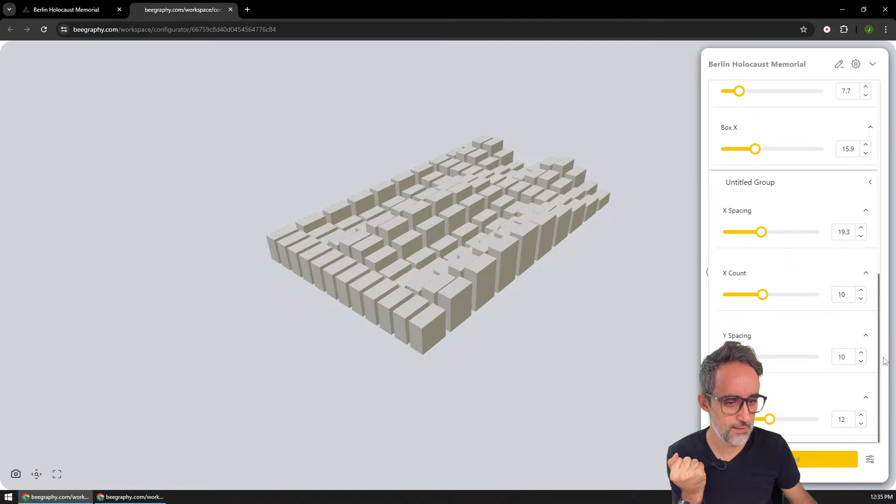So this one. If I were to now say configurator, this is basically what I get here, and then I cannot... oh, I can download. I can download because I did set up an exporter. But if I don't have an exporter, then there's no download button.

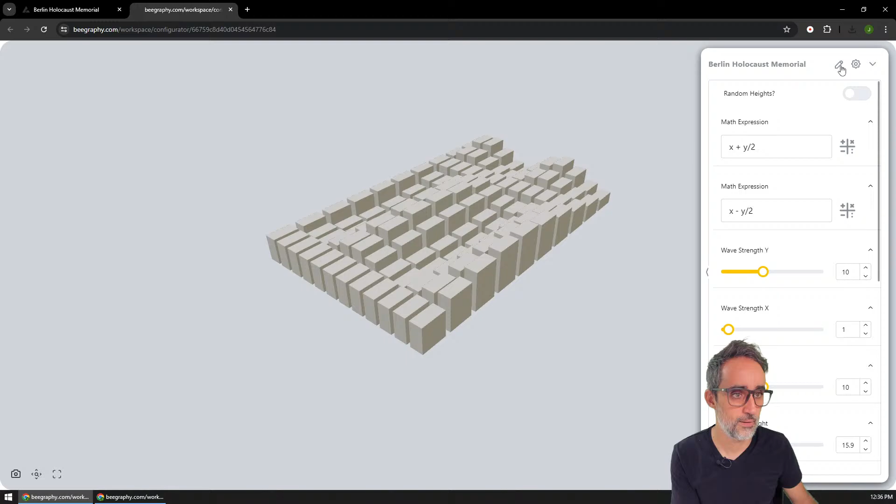So I can move these colors through the viewer. Back. And all right, but now if I have this, there's no undo button.

And how do I publish to the market? Demo, what is demo? Oh, okay, so this is what it's going to look like. And how did I publish to the market? My models, Berlin Holocaust Memorial, editor, viewer. Okay, viewer configurator, so that's what I did before. Publish, blah blah blah.

Okay, so that's probably going to put it in the market. Yes, sharing is permission URL, copy link. Oh, what is this? No access, viewer, copy link. And then if I open Chrome with a different account, like a guest mode — internal server error. Oh, we're not gonna try this then. Okay.

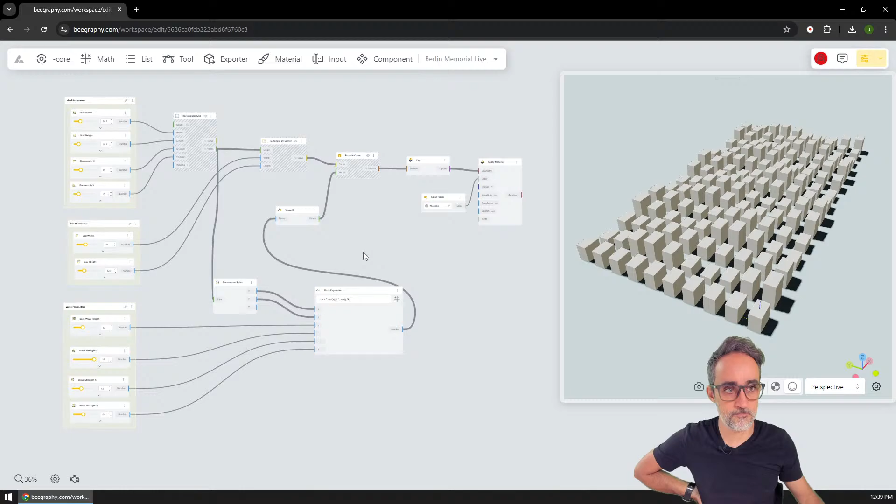And then here, this is going to be Beegraphy. This is the model, okay? So, Berlin Memorial Live, okay?

Oh, I see what you mean. Okay, thank you, Lernick. So if I share a link with someone else, that someone else needs to be logged in their own account to be able to see my model. Okay, I see what you mean. All right, beautiful.

So let's get started. Still thinking. Gathering my thoughts.

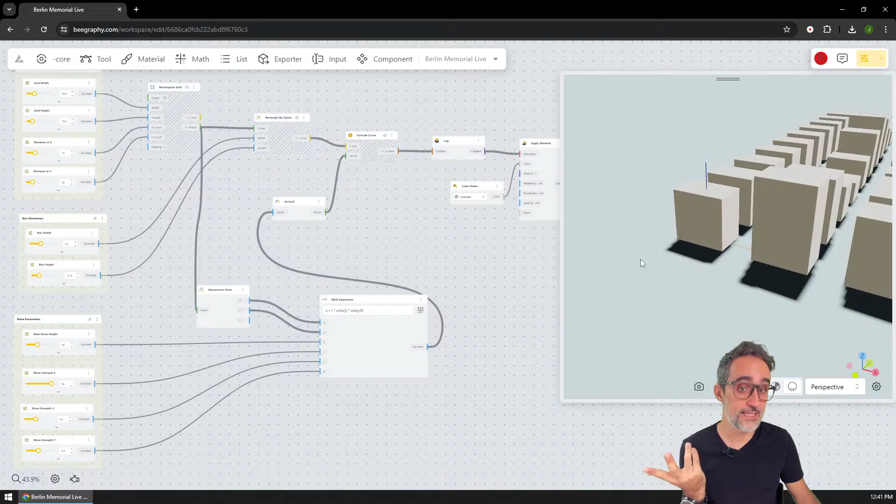Okay, so as I said, let's talk about how to download, export, and share models that we have created with the Beegraphy editor. So I'm going to go back to the Berlin Memorial Live model that I did in the previous video. You can see that I have here my model, I have my boxes, so I'm very happy with this result and I'm ready to download it and use it.

Okay, so how do I do that? Well, there's several ways you can do that. The first one is setting up an exporter for whatever geometry or whatever output in the entire definition you are interested in downloading. So in this case, the boxes that I have are somewhere here — these are the boxes that I extruded.

No, they're actually these ones here. These are the ones that are capped, right? Whether I'm applying the material or not, that doesn't matter — this is only for visualization, but the actual geometry that I'm interested in is here.

So you may have noticed that in the editor, we have this exporter, which basically allows me to download files in STEP, STL, OBJ, DXF, or IGES, right? Because these are just simple boxes, I can go, for example, with an STL exporter, and then I'm just going to plug it in here, all right?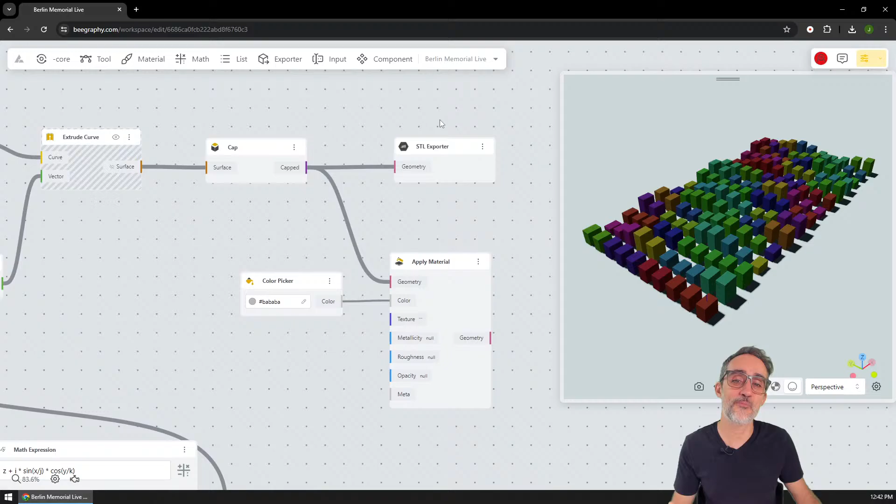But now, okay, so what do I do now here? How do I actually download anything? Where is the download button? I don't see it. Well, you don't see it because the way Beegraphy handles this is that it basically allows you to wrap an entire definition into what they call a published model. This published model basically means taking all these components and all these definitions and all these functions, blah blah blah, and wrapping them into a viewer where you have access only to what's important in your definition.

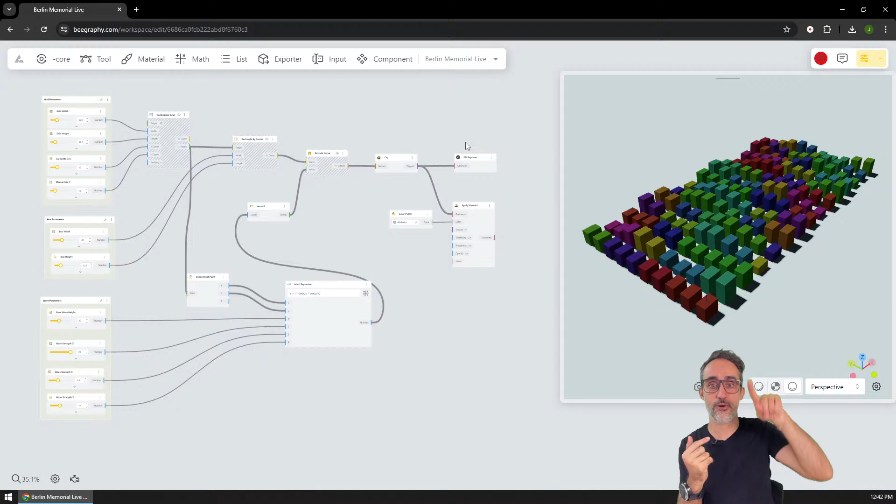Probably the sliders that are generating all the configuration for the model, and the downloading of whichever parts are interesting for you. So how does that work? I'm going to go all the way here to the right corner and click on the configurator on the top right. The configurator is basically a preview of this interactive window that gives you a summary of what's important and hides all the model away.

You can see that immediately what I have gotten here is a pre-populated set of a bunch of things. So what the Beegraphy editor does is it goes into your definition and takes anything that could be considered as an input - sliders, but not only sliders. Remember the color picker I was using for the rendering, or the equation I set up for the math. All of this is now provided as an auto-populated UI.

Let me move myself to the other side of this. Now you can see that I have a pre-populated UI, and you can also see that all these sliders are grouped by name.

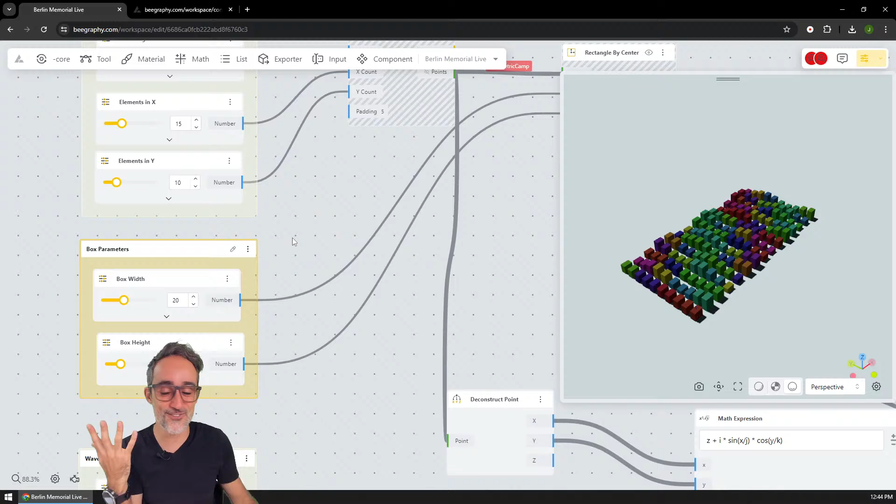So you can see that when I was making my model, I was very diligent about taking a bunch of sliders and grouping them by some kind of name - grid parameters, box parameters. This is not only useful for me, for my mental sanity, it's also really useful to organize inputs, then for the configurator to group them based on interest. You can see, however, they are sorted in whichever way. Fortunately, we can actually edit that.

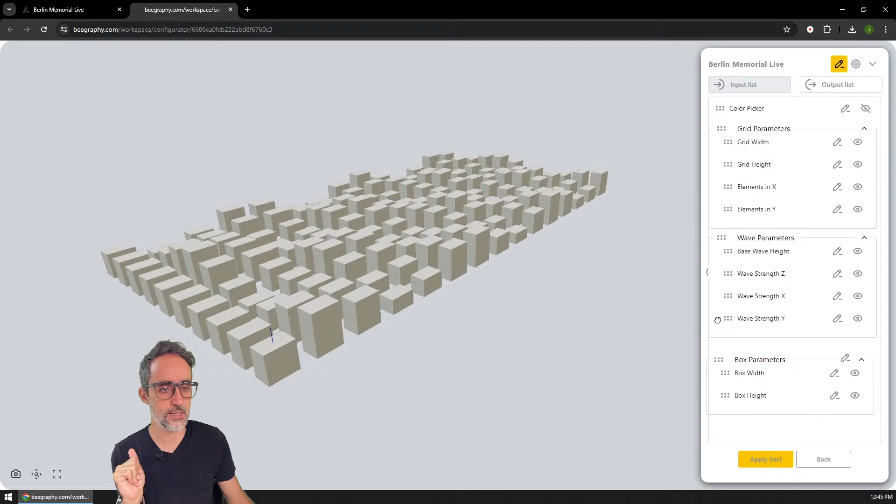If I go here to the edit button in the input list, I can say - remember the color picker for the concrete? This is something people should not be able to change, so I'm going to turn it off. Now I'm going to bring grid parameters first, which I think is the most important, then box parameters, and then wave parameters. If I apply this, you can see that now things are sorted in a much more useful and rational way.

But you can see I still have the math expression editor here, which I don't think people should touch. So I'm going to turn this off too. Now people who visit my model are not going to be able to see or tinker with that. But this is fantastic, because now I know I can change this here, I can add more elements here, and then my model is going to adapt to those changes.

You can also see that I have a download button. Where is that download button coming from? Let me close the configurator. Imagine that I did not have the STL exporter - I'm going to delete this. If I did that and went to the configurator, you can see that now there's no download button.

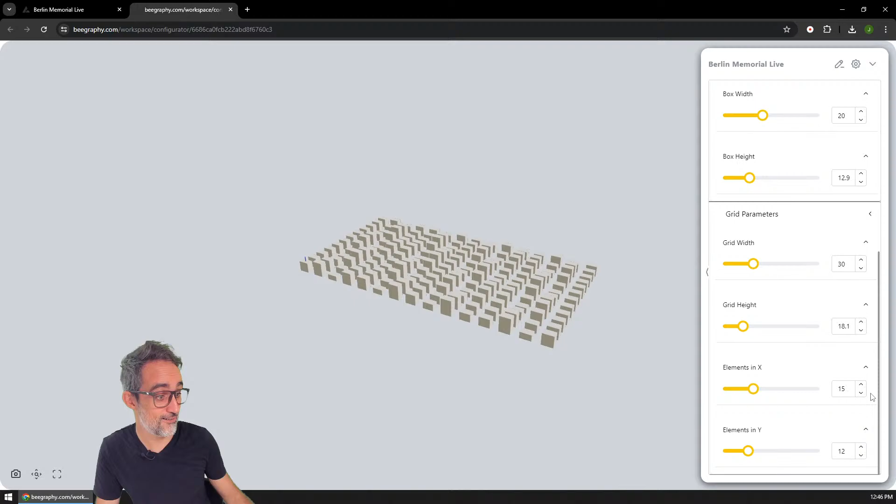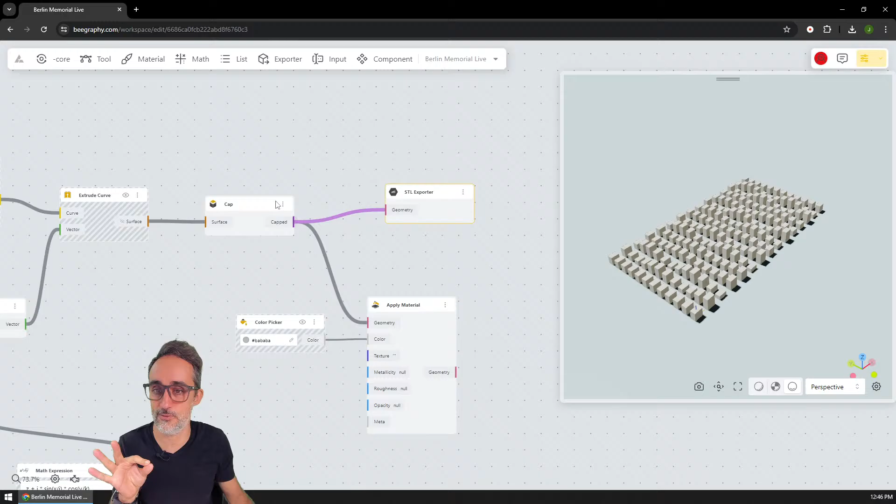There's no download button because Beegraphy doesn't know exactly from all the stuff I have in my parametric model, all these boxes and functions, which one is the one I'm interested in. So that's why being purposeful about telling the editor, hey, I want to export this geometry coming out from this. I'm going to set up an STL exporter here, and call this download boxes. If I go now to the configurator, you can see in the download button that I have downloaded this STL file.

Now if I open, for example, Rhino, and drag this STL file in, you can see that yes, it opens the file, no problem. And that I have in my file all those boxes that now I can render, I can export, I can 3D print, I can do whatever I want with them.

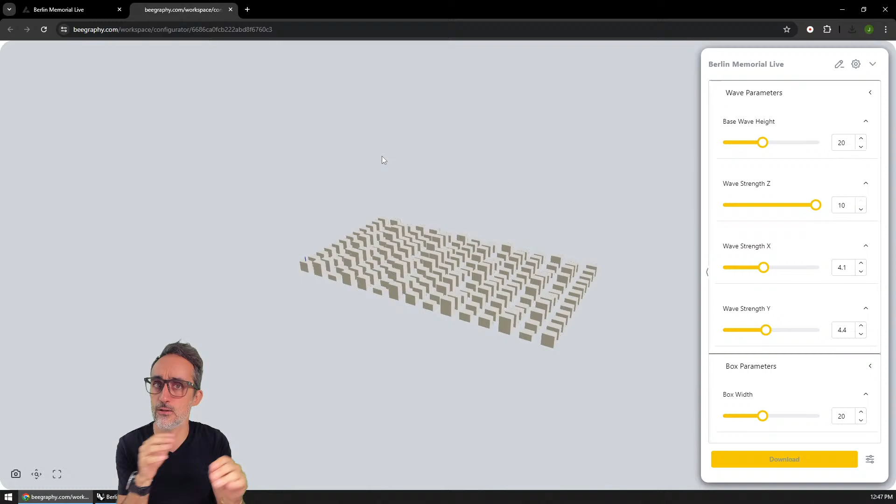Now, why is this configurator so interesting? Because the configurator is a way of wrapping your definition with this UI, so that people who don't have knowledge of parametric modeling, who might get scared by all this spaghetti of components connected to each other, can interact with it in a very nice, neat way - where I give you the things I want you to be able to change, and a button to download whatever is important about this definition.

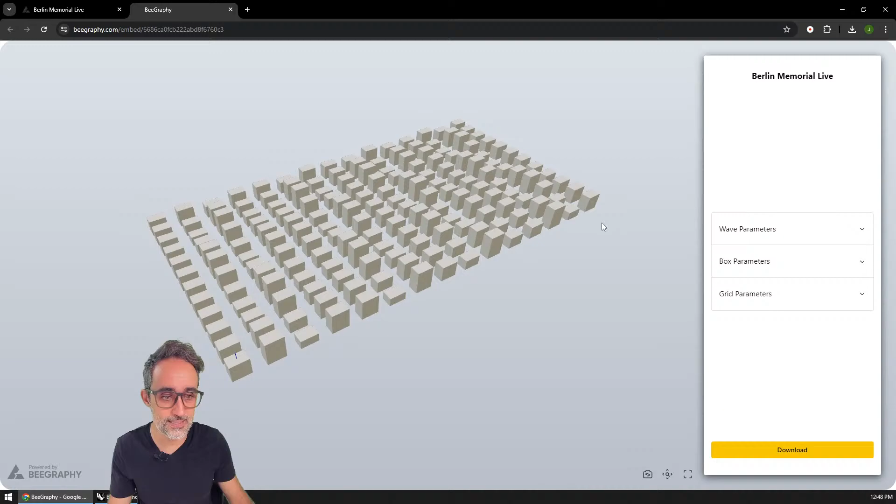Everything else for the regular user should not be available, right? So I can demo what that looks like in the demo button, and I can see that now I have the UI the way people will see it. The wave parameters, I can change a bunch of things here. The box parameters, I can make the boxes a little larger in this direction.

And then, are you done? Yes, download the thing. Can you download boxes? Can you download high? Can you download blah, blah, blah, all these options, and then just download the model. All right, fantastic. Why do I have export option?

Because actually your definition may have different things that you may want to export. In the pearl necklace, for example, we may want to export the spheres, but we may also want to export the curve independently. So we may actually have different exports and allow the user to choose what is it that they want to export.

So you can see that in our demo, our modeling app is now less of an editor, it's more of an app. It looks good, it feels good, it has just what we want, everything is properly labeled, everything has names about what it is. So my OCD is very happy right now with this.

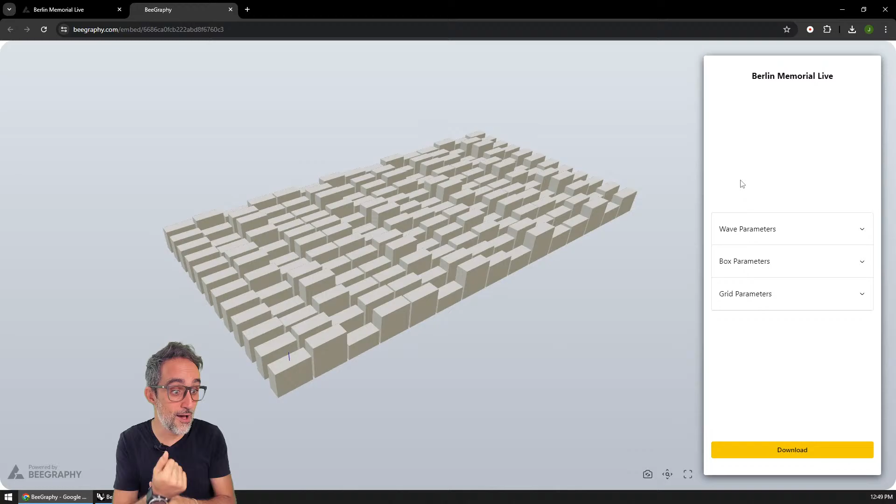Now the question is, how can we make this accessible to the entire world, not just people with a Beegraphy account or with the knowledge of Beegraphy. So the way we do that is by publishing those models to the market.

What does that mean? So this is the Berlin Memorial Live. I have already configured it, I have already cleaned it, I have already the configurator and the demo ready to go. So what I can do now is I can publish this model.

By publishing this model, I can say, for example, let's give it a name: Berlin Holocaust Memorial, and this is going to be parametric camp demo, for example, and I'm going to say quick demo of the Beegraphy editor plus market, recorded live on parametric camp.

Okay, so category, I don't know, architecture. We can do architecture, and another one, gaming, industrial design. Yeah, why not, all right, beautiful. Tags, we're going to leave it as it is. Free is going to be licensed, etc. It's going to be production ready, intended material. Oh, so that's for fabrication. We're not going to, well, and we're going to publish this.

All right, so chosen, non-commercial requires attribution, for example. So I'm going to publish this. And then you can see that I think I published this somewhere. And this one now, yep, so you can see that now the model is here.

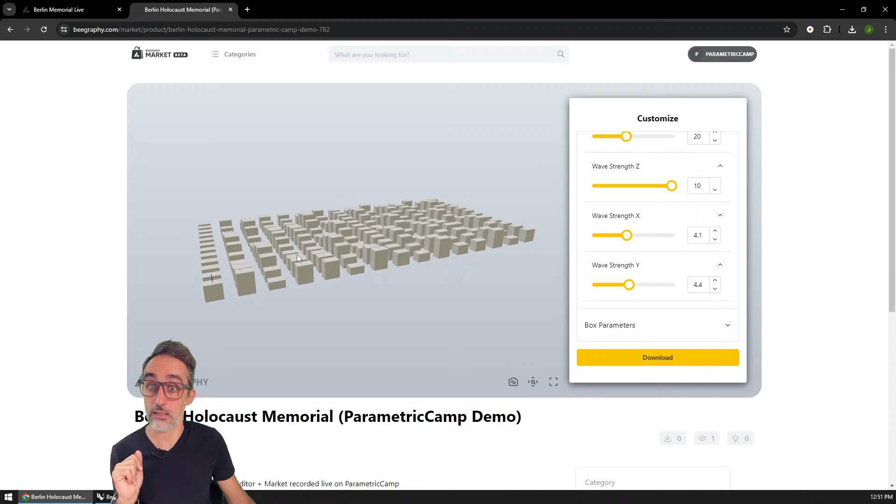And if I click on it, you can see that I have the editor, I have the boxes, and I have all the parameters, just like they looked in the configurator once I cleaned it up. I can go full screen, and then you can see that I can customize everything, change things around, and download the model. The model is downloading right now, I think. And yeah, that's pretty much it.

So this is this part, let me go back to my corner. This is the part that I really like and that I think has the most potential of the entire Beegraphy project. I think the editor is great, but the fact that you can so easily, with a bunch of clicks, make this accessible and downloadable to the entire community, even for non-experts, that's where this really has potential. Imagine how all these models can be downloaded for people who want to 3D print things, adjust dimensions, etc. I think it's a very nice possibility. Okay, beautiful.

I think this is what I wanted to cover with this video: how to take a model in the editor and how to make it accessible, downloadable, and customizable to anyone. With this, I'm feeling pretty good about this mini crash course on the Beegraphy platform.

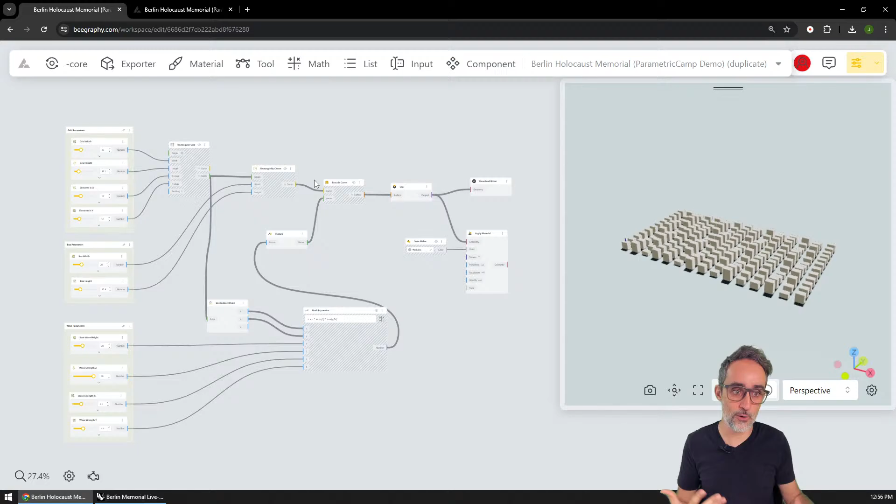Hello, this is Jose Luis here at Parametric Camp, and welcome to another video in this mini-series, Introduction to the Beegraphy platform. In this video, I would like to show you how to go from a parametric model that you have created in the Beegraphy editor, and then how to take whatever geometry you have created and export it, download it, and publish it into a very clean UI that can be customized.

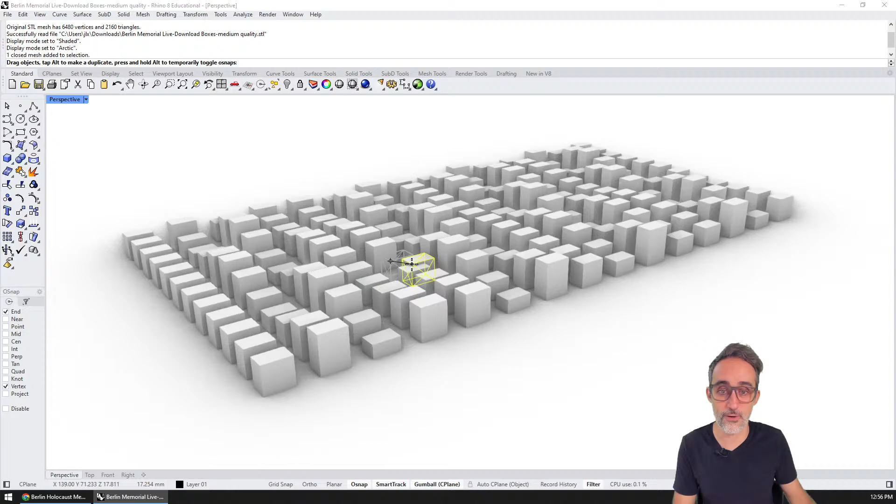This UI is for anyone who doesn't have the parametric expertise that you may have, to just go in and change a couple things and say, 'oh, this is the model that I like, can I download it?' Here, just download the boxes, and boom, I download my STL and now I have my model downloaded for some other platform to 3D print, visualize, render, whatever that looks like for you.